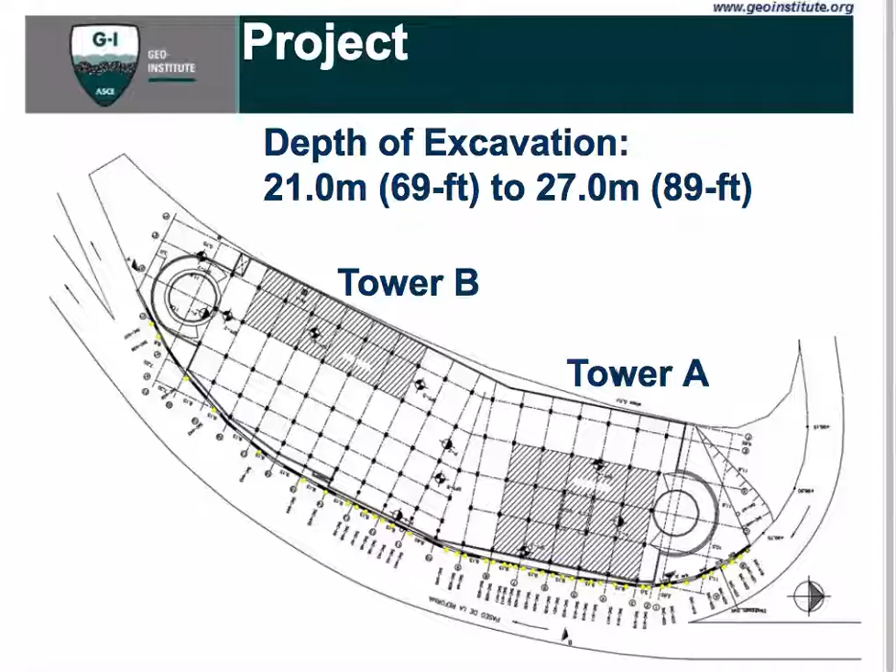So going from the 1970s to the 1990s, we see major development happening near the project site. Prior to that, this region was abandoned. Twenty years before the 1990s, in the 70s, this place was used just for accumulation of non-controlled fill materials, brought in from the city and placed without any control in placement or material classification.

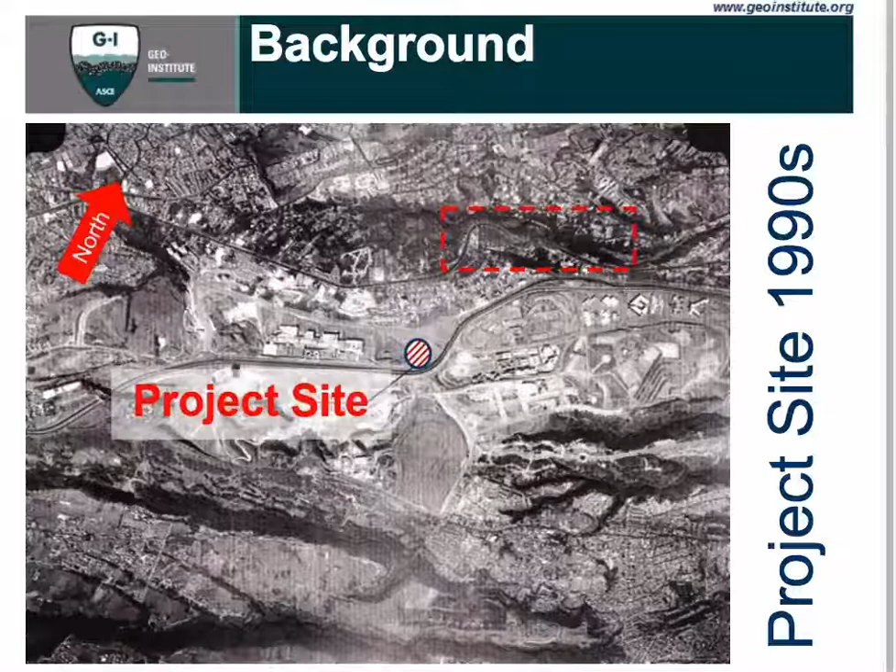So looking at the site again, we went through a process of geotechnical exploration. We selected 7 standard penetration tests, or SPTs, 4 open shaft explorations, and 45 solid stem auger tests just to see what comes to the surface. We also had access to another 15 standard penetration tests that had been done in the past.

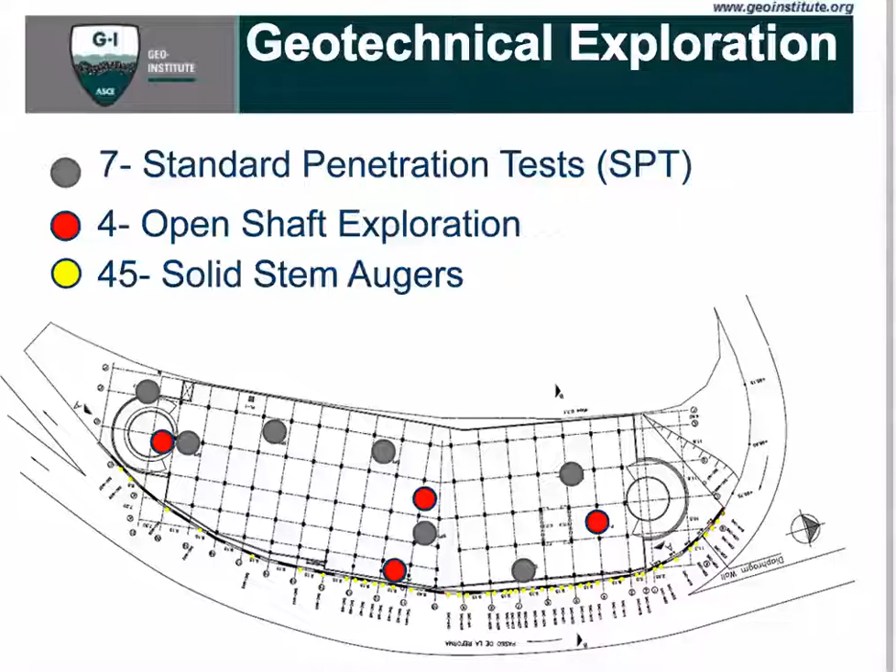Based on the existing information and new exploration, we were able to classify the material. However, the challenge wasn't so much classifying the subsurface—it's important to understand what's underneath before excavation—but assigning design parameters for this purpose was a major challenge. On top of that, knowing how far down this fill material extended was also another important factor for the excavation project.

So we selected some representative borings. The majority of borings came out the same, though elevations would change as we moved from the north end to the south end, with this fill material becoming less and less thick. I'll show that in a couple of slides.

How did we classify the non-controlled fill material thickness? Looking at these borings, we have primarily medium coarse sand, some clay, and construction debris up to 5 meters, followed by sand and silt, clay mixed with construction debris and plastic material up to 19-20 meters. After that, down to 26.4 meters, we had again construction debris, clay brick fragments, gravel, and sand and silt mixed. At the end, the blue sand, or blue dense sand, is a silty sand with less than 4% fines, classified as dense. This is very typical of the region.

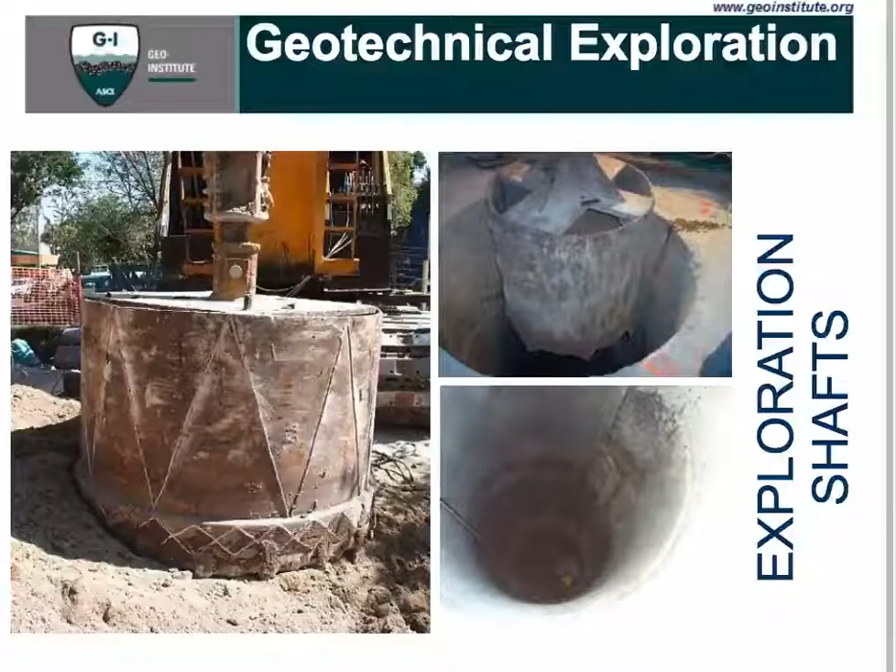But on top of that, we did some exploration shafts. These were like 4 feet diameter, stabilized shafts, vertical, open. The purpose was just to open the shaft, go inside, with certain restrictions from local authorities, and do a visual inspection, as you can see to the left. That is from the protection around the perimeter of the shaft, we were able to open and look at the material. To the right, you can see a couple of pictures of the material coming out from the auger, the flight auger testing.

So we can see there are all different types of materials - different types of construction debris, plastic, even there's a shoe there, I guess. So it was a challenge at that point: how do we classify this?

Do we assign design parameters based on SPT? Do we assign design parameters based on lab testing? Or do we just go ahead directly and design everything based on assumed data and do some testing - which is what we did, and we're going to look at the data here shortly.

So we got some preliminary lab report: average unit weights of 1.75 tons per cubic meter - those are the standard units used in Mexico, about 100 pounds per cubic foot - and the internal friction angle of 30 degrees, and cohesion values were negligible. I apologize for that typo, that should have been an I, not an A. And we considered a surcharge of 0.75 tons per square meter, or 150 pounds per square foot, for the design process.

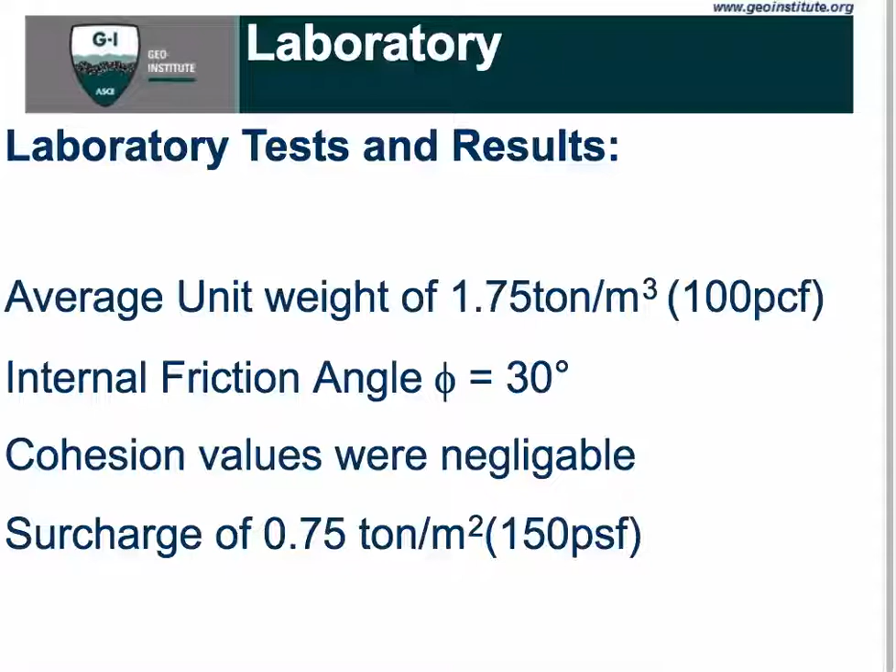And with that, and the results of the boring, we started looking at the thickness of this fill material and how we would approach the design by sections.

So now we're going to look at Tower A to the left, because now we're looking at the future diaphragm wall, at the design of the diaphragm wall. Tower A is to our left and Tower B is to the right. You can see the blue material, obviously, is the blue sand. And the yellow coloring represents deeper sand deposits classified as a very dense cemented sand.

Tower A foundation solution - you can see the dotted line - we decided to go with drilled shafts, and Tower B was designed with spread footings at certain depths of footing in the blue sand.

Now, based on the results of the explorations, the SPT, and the vertical shafts, what we found was that between approximately 8 and 23 meters - that's between 27 to 75, 76 feet deep - that's the non-control fill material, or unnatural soil. The deepest thickness will be to the north, and the shallowest will be to the south, closer to Tower B.

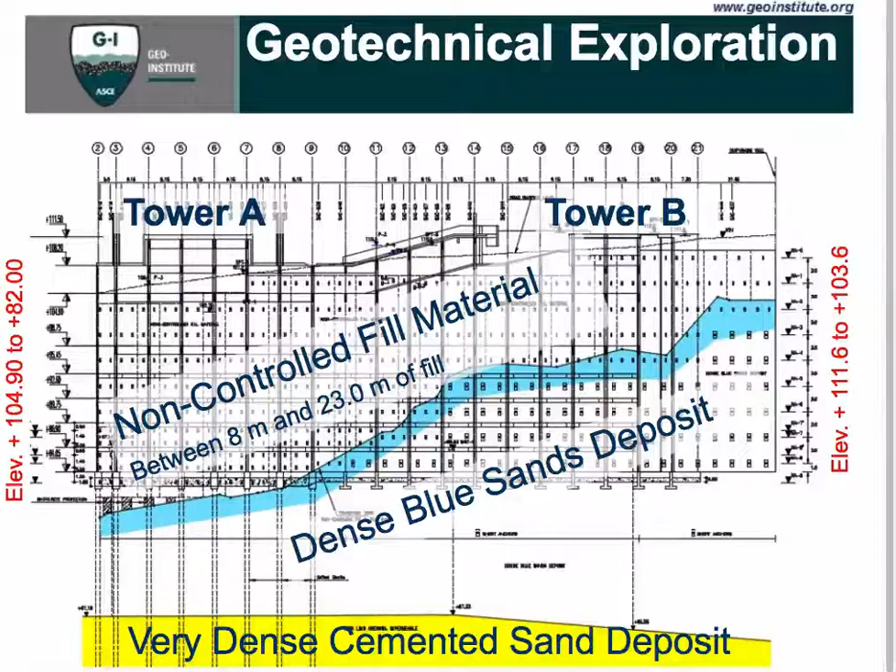Then from that elevation we would have a dense blue sand. A couple of important things to mention are the transition zone and the existence of the diaphragm wall when it goes to the transition zone.

So I'm going to go on - I think I missed 15 minutes, I apologize for that. We started our design going with a horizontal pressure based on Rankine, and then redistributed the pressure using Terzaghi-Peck and some of the modified Mexico City methods that existed.

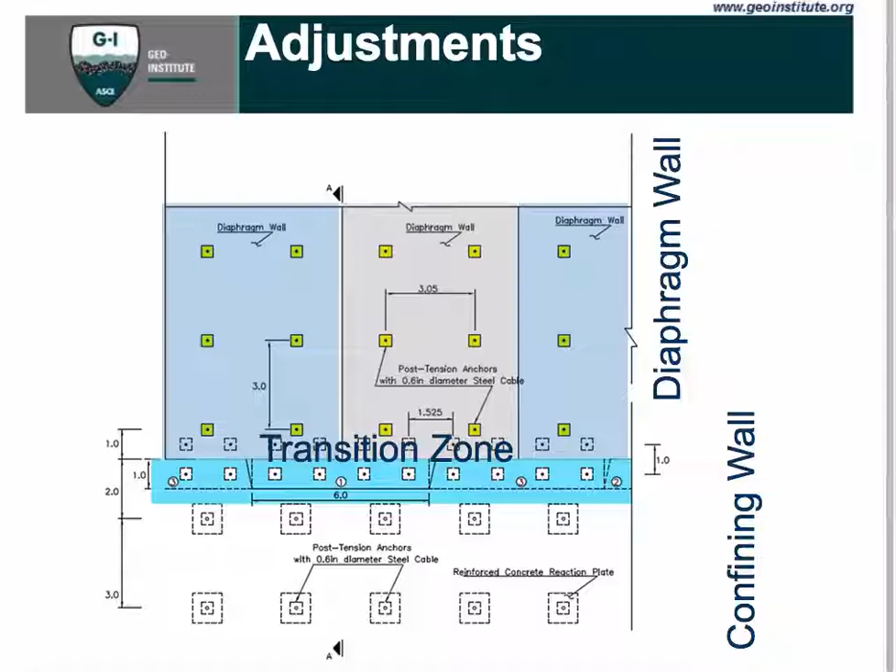We basically distributed the anchors at 3 meter by 3 meter spacing, post-tension, and came up with approximately 75 tons of resistance. To achieve that resistance, since we had much uncertainty about this fill material, we decided to perform load testing above the transition zone, near the confining wall and diaphragm wall, and below the transition zone. We installed a couple of these anchors and tested them.

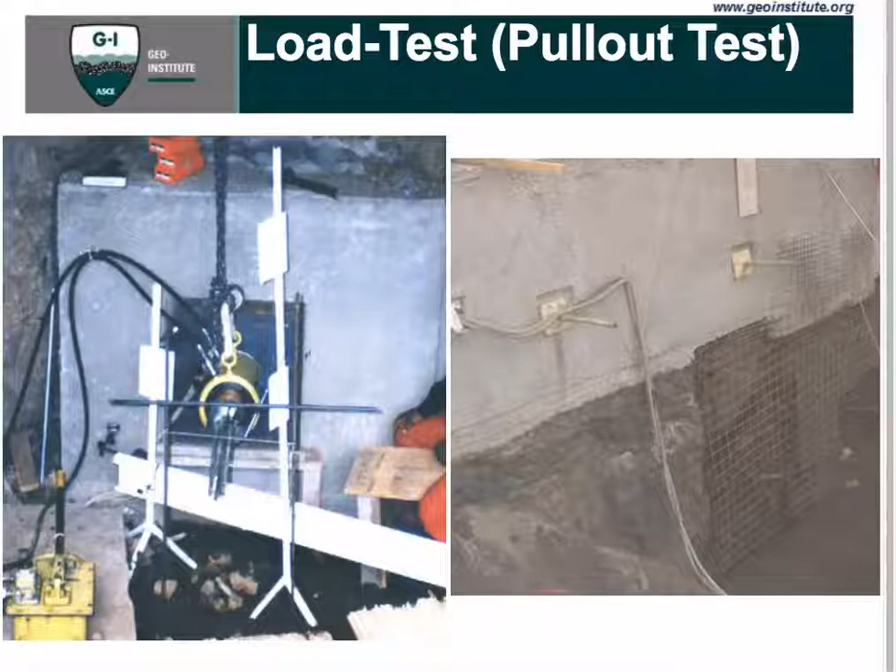Here are the details on the testing, performed in two phases. Phase 1 was to arrange the cables, going to 25 tons and 40 tons. Phase 2 was taking it to twice the load, approximately 140 tons, and we got results within 1% elongation.

The total bonding length was 15 meters, the working length 15 meters, and 1% of that - the closest one was anchor test number 2, which approached 15 centimeters.

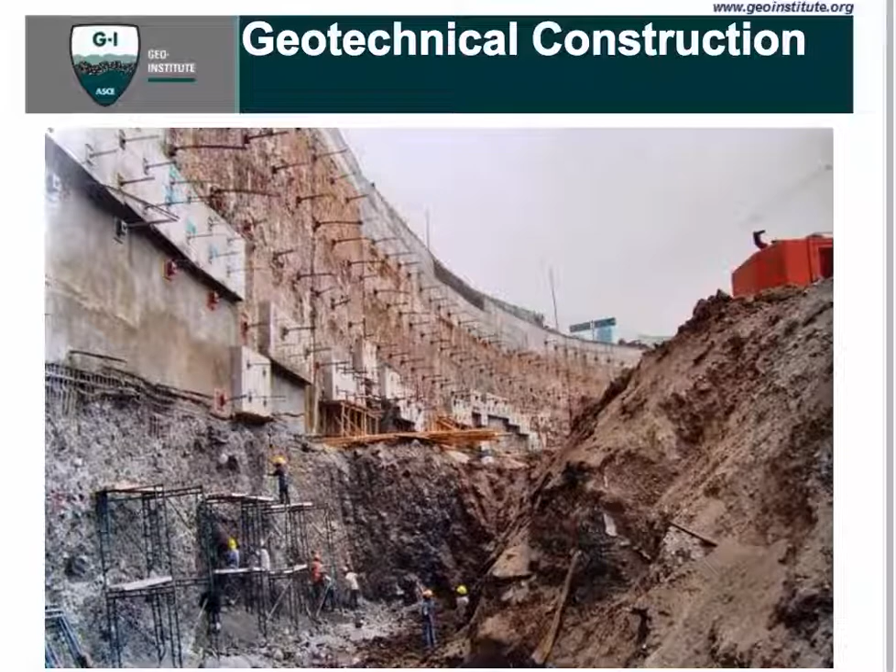Finally, some major challenges we had to go through involved the transition zone. With all the different explorations, we did not basically match this transition zone. So in some places we needed to create new confining walls to retain that bottom transition zone, and in some places the elevation presented at a different level than we had expected.

During this, we had challenges, as with anything else, about available information, quality and quantity of site explorations, quality of lab testing and the results, how we selected the design parameters, how we verified this design through load testing, and we had to modify certain construction processes, including monitoring and instrumentation for this project.

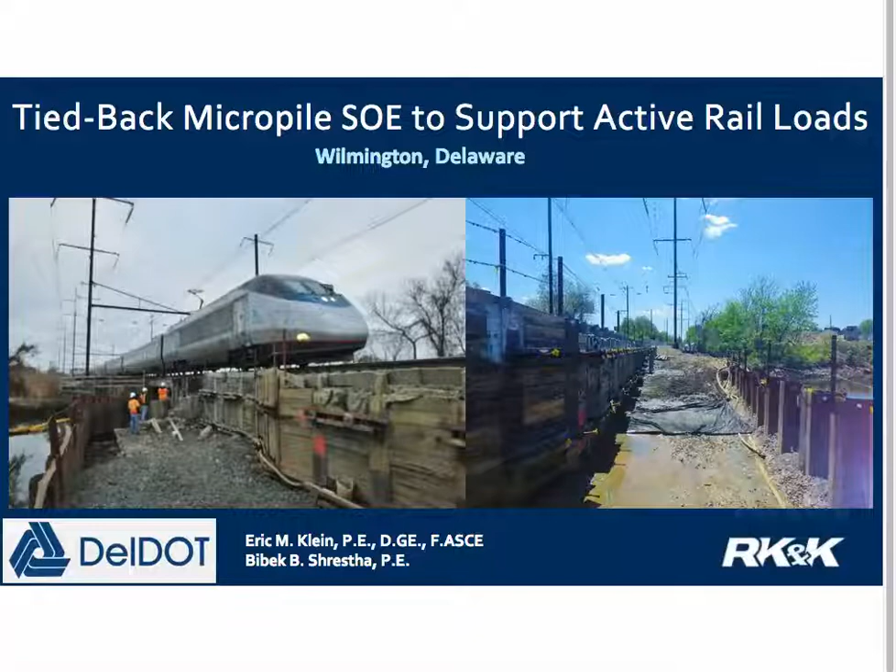tiebacks in this case. This project is located just southwest of Wilmington, Delaware, just northwest of I-95 and I-495, and upstream of the confluence of Little Mill Creek and the Christina River. As you can tell by looking at the drainage patterns there, the area is very very flat, swampy, and outside of the swamp, it's very congested.

Now, the Northeast Corridor is the main rail corridor serving intercity passenger rail between Washington, D.C. and Boston. Through Delaware, it's owned, operated, and maintained by Amtrak. But in addition to Amtrak trains, you've also got Norfolk Southern Railroad freight traffic, the Delaware Transit Corporation, and SEPTA, the Southeastern Pennsylvania Transportation Authority, have commuter passenger rail service, so it's getting very crowded.

Generally, throughout most of the NEC, there's 3 tracks, but there's about a 1.5 mile long gap here in Delaware that was creating congestion. Now, the tracks in this area were first laid in the 1850s.

The oldest plans we had were from 1929, and they showed the addition of electrification, the construction of a 3rd bridge, which is the purpose of this study, and repairs to the abutments and wing walls of an existing bridge that carried 2 tracks. Those existing 2 tracks that crossed Little Mill Creek were 30 feet long, and that bridge was built in 1913. This 3rd bridge, the track that carries the 3rd track, was built in 1929, was 54 feet long to accommodate a bend in Little Mill Creek.

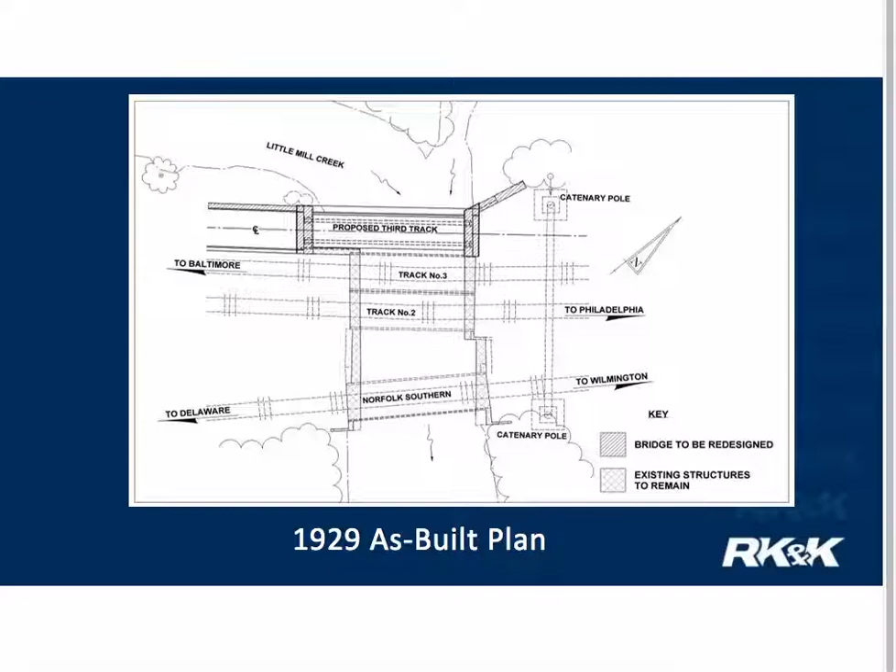This fence diagram here simplifies what we found. There was fill associated with the embankment, mostly fine-grained material - silt, low-plasticity clay, some sand, some oversized particles, about what you'd typically expect. Then there was some soft to medium organic clay associated with swamps, typical of where we were. Then we had some medium dense coarse-grained soil, mostly sand and gravel, I think that was Cretaceous age. And that directly overlaid some continuously or completely weathered rock to bedrock.

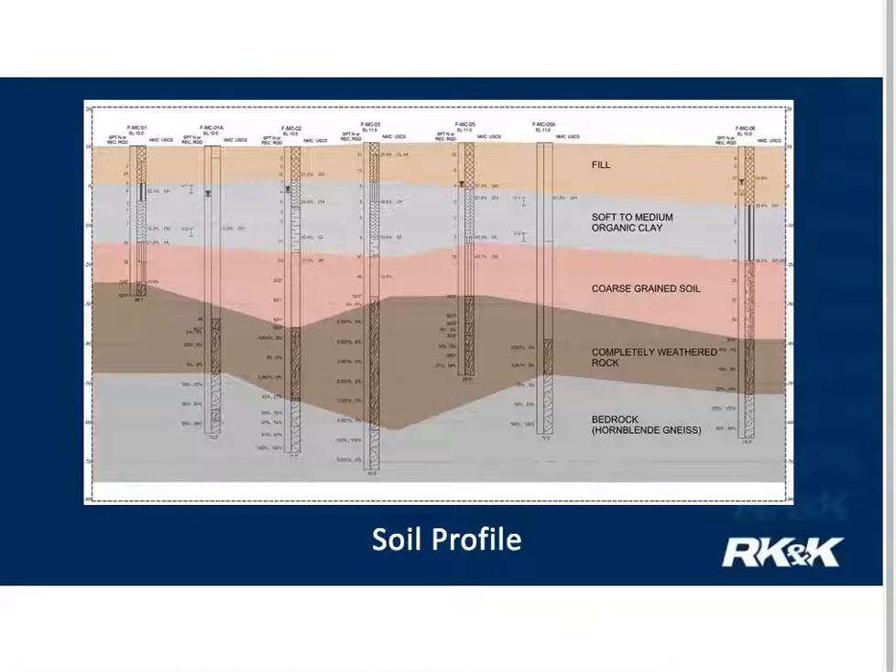Fortunately, northbound trains were already starting to slow down for the Wilmington station, and the southbound trains were still accelerating out of the Wilmington station, so they weren't going their full 120 miles an hour, I think.

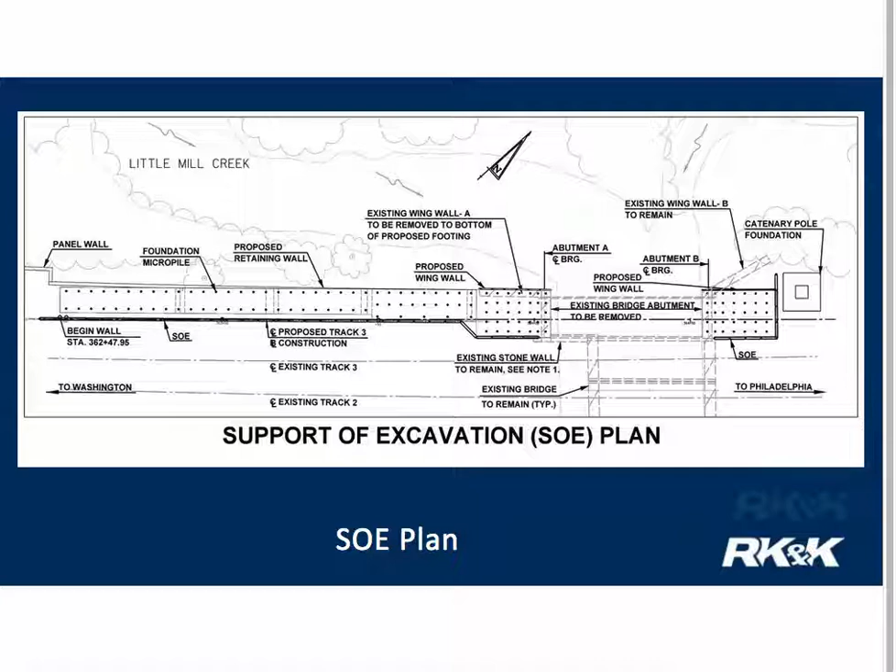The plan view here shows the north abutment had an SOE, to the right of the figure. It was L-shaped because you also had to support a cat-pole foundation. Then to avoid impinging on wetlands, we had to extend the wing wall almost 300 feet from the south abutment. All those dots you can see are the micropile foundations.

The micropiles were a 7 5/8 inch diameter, half-inch thick wall casing made of 80 KSI steel. To provide some additional stiffness, they added a 5.5 inch diameter, 20-foot long casing in the upper 20 feet, with no joints installed to help improve the stiffness of the micropiles themselves. The micropiles generally were 2-meter-long sections, at 5-foot center to center.

Because there were 2 rows of tiebacks with some pretty significant down angles, the axial load on each micropile was about 25.5 kips. At this point, I'm going to turn this over to Bibek, and he will go into more details on the construction and the instrumentation results.

Thank you, Eric. I'll be talking in more detail about the construction itself. This is a typical cross-section at the abutment. As you can see, we needed quite a wide section excavated to install all the micropiles for the abutment foundation, which resulted in our SOE being installed 2.5 feet from the edge of active track.

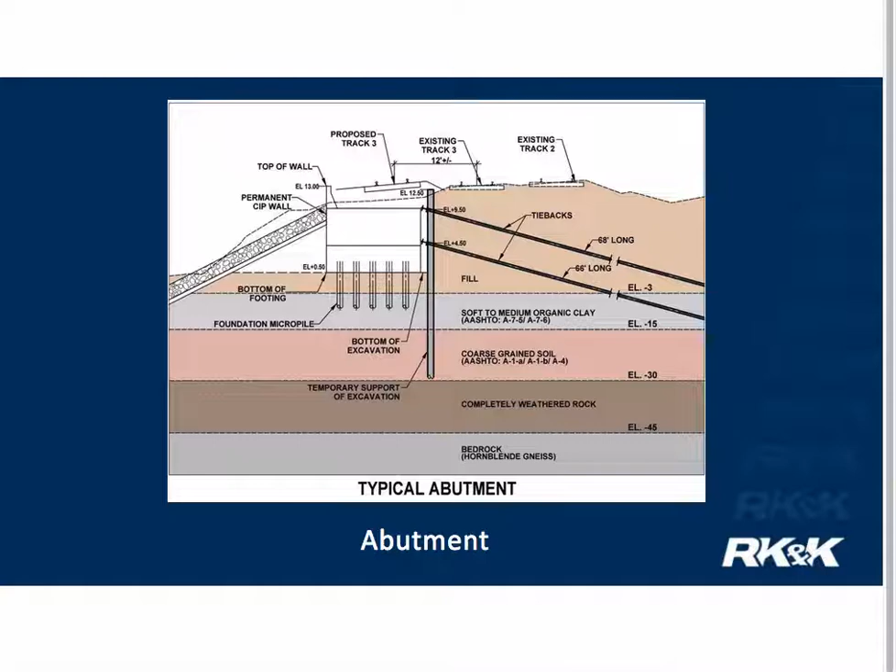The tiebacks needed a steep angle because Amtrak required that no element would be within 4 feet of the ties. The length of the tiebacks were in excess of 60 feet. We had 15 feet of unbonded zone, and the rest, 50-plus feet of bonded zone.

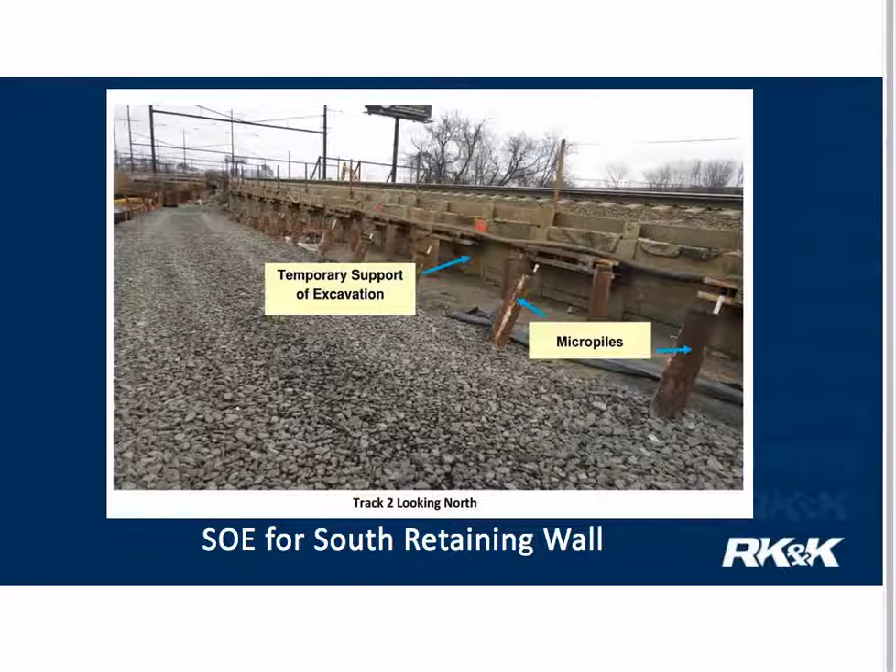The train above is an Amtrak train. That was how close the trains were running to our support of excavation. And further north, you can see the stone masonry for the old abutment. This was during the demolition of the abutment while we were taking it out for the new abutment.

Now, during construction, here's a picture of the wing wall of the existing abutment that had to be left in, that was supporting the active track.

All our as-built plans showed that the wing wall was all the way to the top of the ballast. However, during construction, we found out that the walls didn't go all the way up, so we had to design a ballast stop to retain the ballast of the active track. A contractor initially designed a system to install micropiles through the stone masonry wall. However, during construction, we found that the stone masonry was just a veneer wall with rubble fill behind it. So we designed the micropile system in front of the wing wall and put in tiebacks to support the ballast.

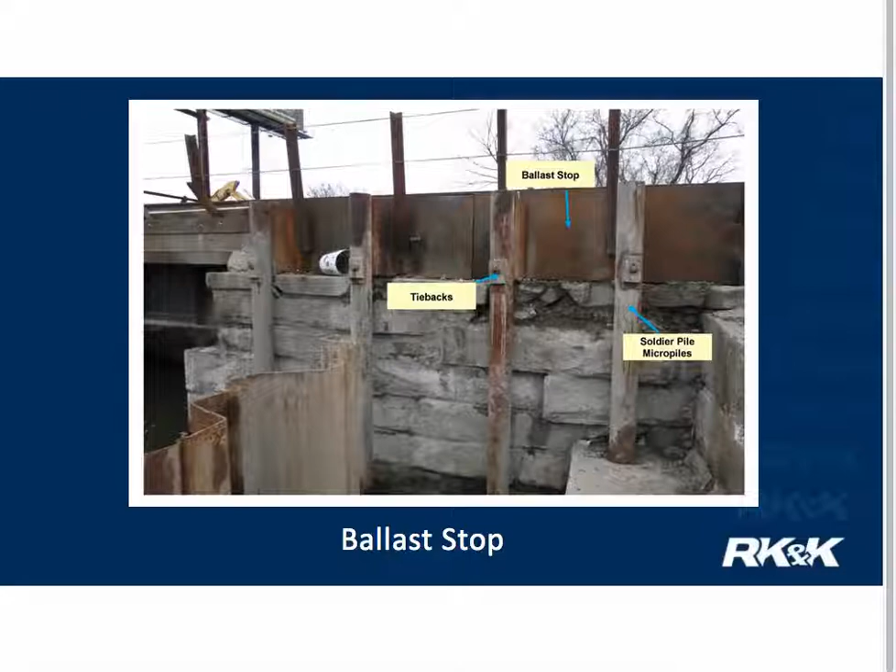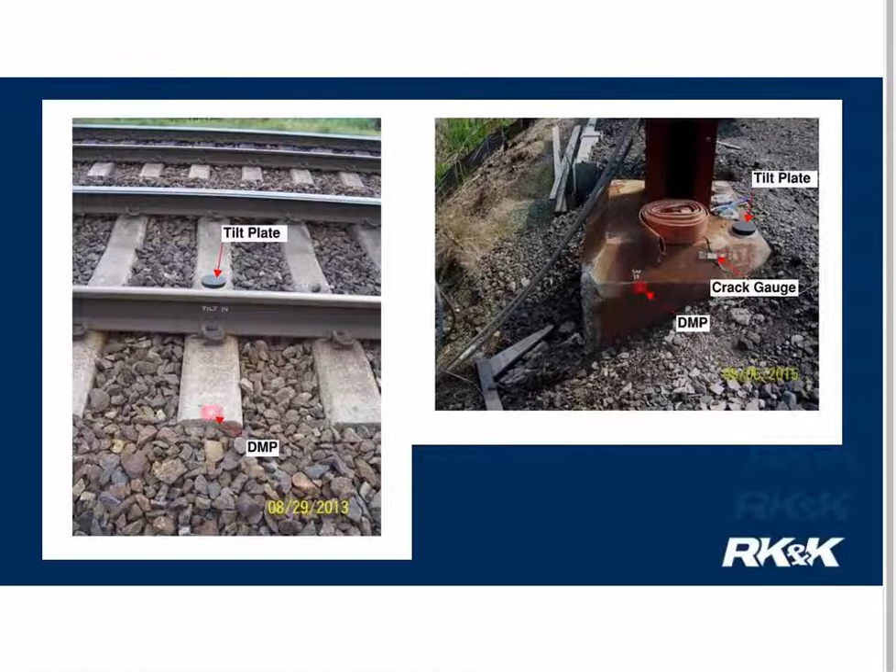Here's a snapshot of the instrumentation we had in and around the bridge. We had a lot of deformation monitoring points - on the ties of the active track, on the soldier piles we installed, and on the catenary poles as well. There's some pictures of the instrumentation, like tilt plates and deformation points on the ties and catenary poles.

Around September 2015, we finished installing the grout bags and scour protection, and also grouted behind the grout bags underneath the existing abutment. After that, you can see the movement flat-lined, indicating that all the movement happened because of the scour. While doing these measurements, we also went out and retested every tieback, thinking it might be creeping and causing the movement, but we found they were still working with not much creep on them.

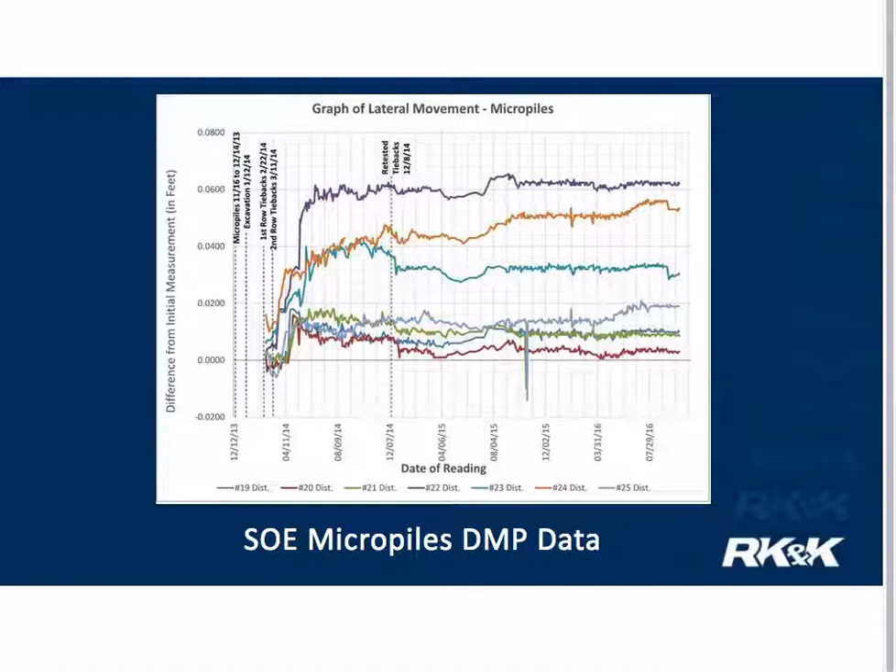In conclusion, micropiles can be used in low overhead clearance and limited access conditions. If properly designed with tiebacks, they can support significant lateral loads. When necessary, if higher section modulus is needed because the casings themselves don't have significant section modulus, we can use composite sections with multiple circular casings to increase the section modulus. As for the deflection of the SOE system, it's a function of the stiffness of the system, which in turn is a function of the spacing of the tieback and soldier piles.

The spacing is very critical in limiting the deflections. Tieback spacing is generally limited to 4 feet because of constructability and overlapping of the bonded zone for the tiebacks. Especially in our case, the tiebacks were in excess of 60 feet long, so we had to make sure they didn't meander and conflict with each other.

As far as constructability and flexibility, installation and locations in micropiles can be very flexible, and we can change during construction if there's any uncertain subsurface condition. Also, as we encountered, we were able to customize the system during construction when we found inaccurate as-built drawings. With this, we figured that micropiles are a great solution to limited access and overhead clearance areas for support of excavation. Thank you.

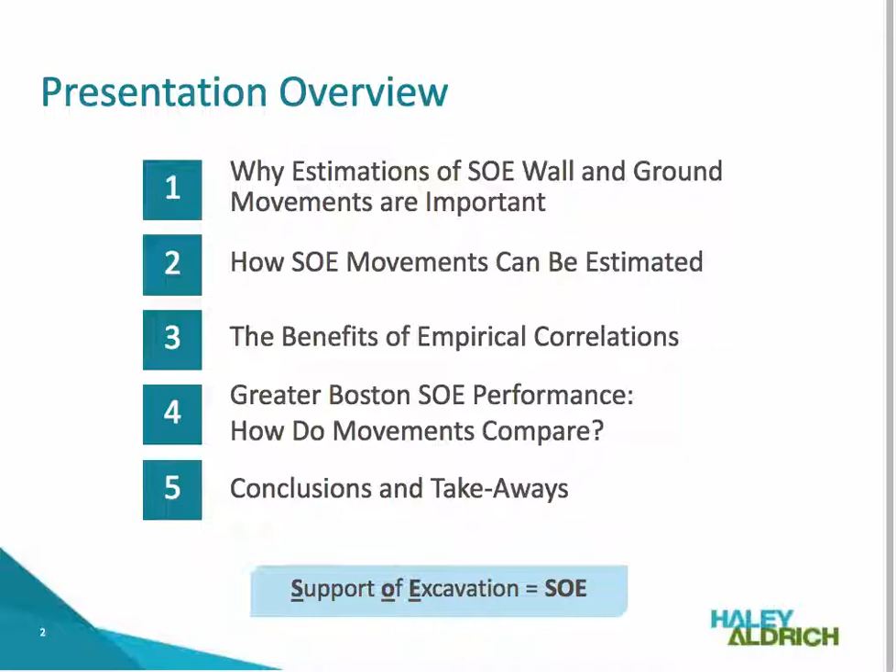Thank you, Glenn, for the introduction. I'll be speaking to you all this afternoon about support of excavation, wall, and ground movements. I'll begin by talking about why estimations of support of excavation wall and ground movements are important, how these movements can be estimated, some benefits of using empirical correlations to come up with these movement estimates, and then spend most of the time talking about how support of excavation performance in the greater Boston area compares to published literature. I'll end with some conclusions and takeaways, and you'll see the acronym SOE for support of excavation throughout this presentation.

So why are estimations of support of excavation movement important? Well, the thing that comes to most people's minds, and what we've seen in these previous presentations, is the settlement of adjacent structures is typically a hot topic, and that's going to be important for any abutter to your excavation. Of particular concern might be high-rise or heavy structures, historic structures of cultural significance, and any structure that is within close proximity to your excavation. And lastly, critical public infrastructure, for instance, like we saw in the previous presentation, railways or perhaps highways, tunnels, things like that.

Utilities can also be affected by ground movements. Significant ground movements can lead to interruptions in service. The last point I have here is constructability for the permanent structure. So, for instance, if your support of excavation wall is a concrete diaphragm slurry wall, it's probably also going to act as the permanent foundation wall for the structure. So the amount that it moves during construction is going to directly affect the rest of the structure and will be a concern for the structural engineer.

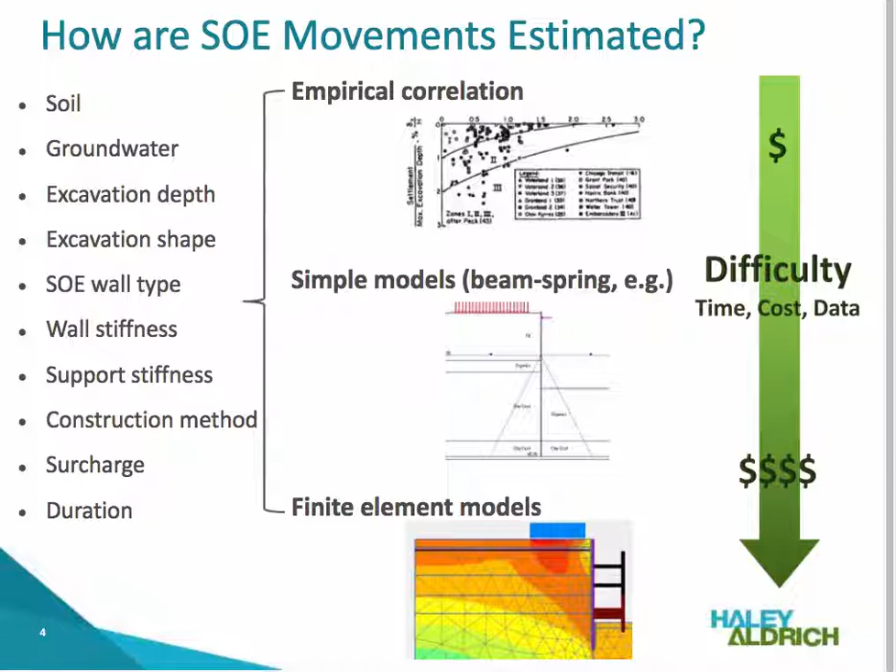But it's probably also going to give you a limited picture of the movements at your site. For instance, you might get movement of your support of excavation wall, but you might not get movement of adjacent foundations. To get that complete picture, you'll need something like a finite element model. Those tend to be much more time-consuming and therefore cost a lot more and require a lot of data to be done well. The point I want to make is that each of these methods can be good and can be bad ways of estimating support of excavation movements.

So when you have all of these different methods, why use empirical correlations? Well, as I mentioned before, they're very fast, and that can be instrumental for early phase design, where perhaps it wouldn't be appropriate to invest time and energy in a model when design parameters are changing quickly.

Additionally, empirical correlations are based on real project data. So they're not theoretical, they're based on observed movement from projects, which means that they're based on the good, the bad, and the ugly that happened within those projects. And that type of data aggregation provides you with a range of response.

That response range can be useful for a number of things. For instance, if you have a wall that's already in place, it can give you an indicator of performance. Did the wall perform better or worse than you expected? And it can also provide a platform to communicate risk to your client. Some clients might care a lot about ground movements, and using an empirical correlation might give you the opportunity to suggest investing in that fancy finite element model.

Alternatively, you might have a client that doesn't really care. Perhaps the excavation is in the middle of nowhere, a cornfield or a parking lot or some situation where large ground movements really aren't going to be a big deal. And also, because of the low investment for empirical correlations, they can be, and I would argue should be, used to calibrate or validate more complicated models, where depending on what you put in, it can be very easy to mispredict ground movements.

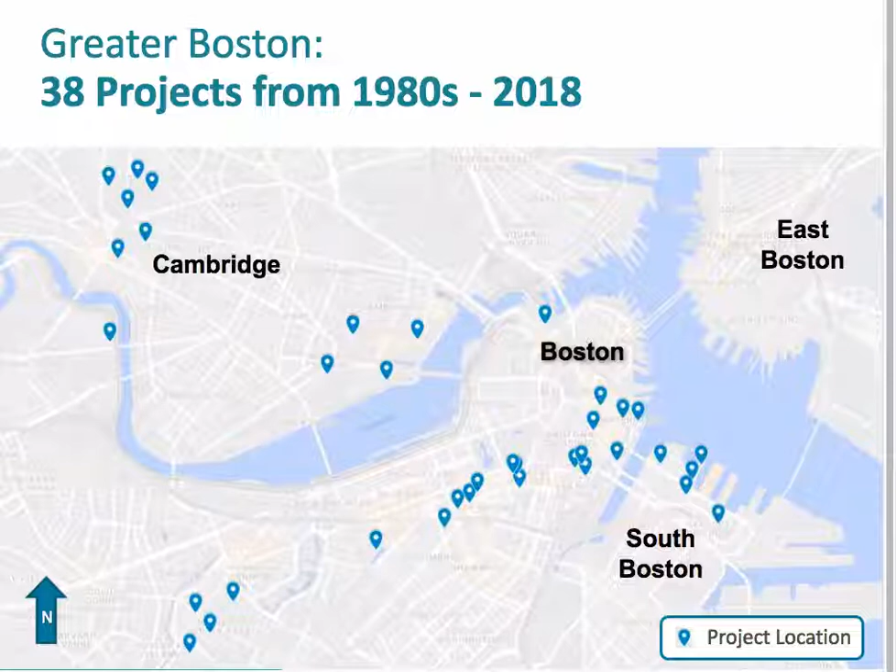We went through our project archives and for this presentation gathered data from 38 projects spanning from the 1980s to the present.

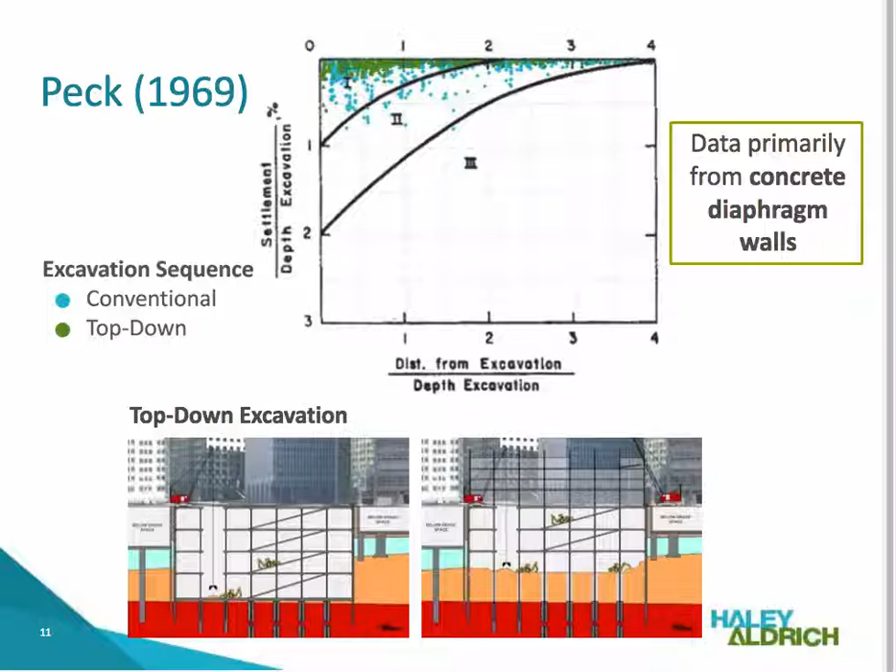Additionally, we've subdivided our data into data from different excavation sequences. Blue represents conventional excavation, and green is for top-down, where the permanent structure is also acting as the temporary support of excavation. So you excavate for your first level of basement, then you pour your permanent concrete floor, then you excavate to the next level, et cetera. Because of that, that concrete floor provides diaphragm action, which is a little bit stiffer than a typical excavation system. And you see that in the ground movements - those green dots tend to be clustered towards the top and are typically lower than the conventional blue construction methods.

For stiffer strata, Clough and O'Rourke put together this plot that now has a new envelope range for excavations in stiff to very hard clay. So I've now further subdivided our data by both excavation sequence and also soil type. On the left, I'm showing conventional excavation sequences, and on the right, data from top-down excavation. On the top, I've got excavations in clay, and on the bottom, excavations in till. And you can see that Clough and O'Rourke's envelope of these movements pretty much captures our data for either type of excavation sequence in till and for the top-down excavations in clay. However, our conventional excavations in clay have a lot of points that land outside of this zone. So this probably would not be an appropriate figure to use for that type of situation.

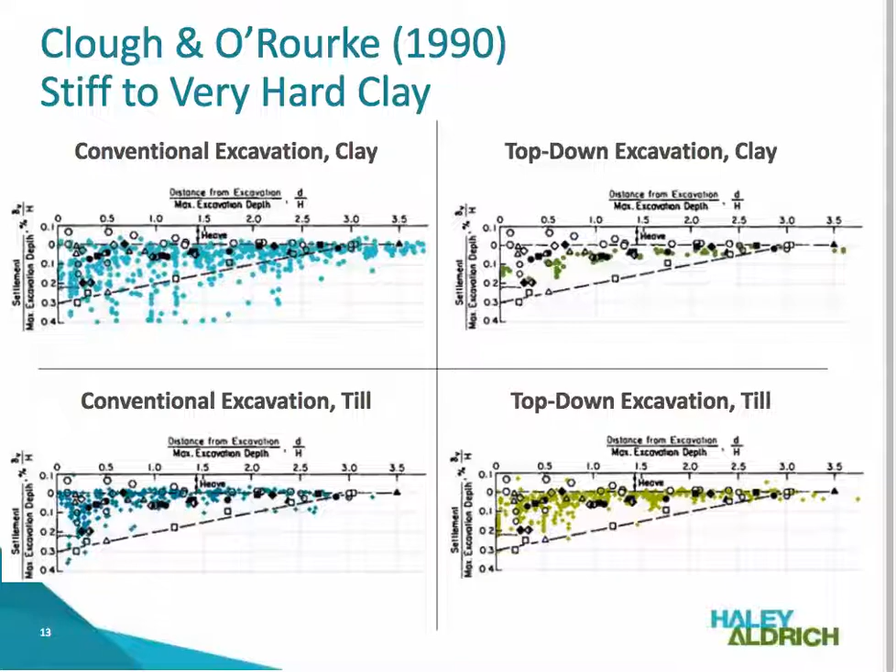And that's really what I want to bring home to everyone. It's important to know where these diagrams or equations come from before you use them and make sure that they are applicable to your project situation.

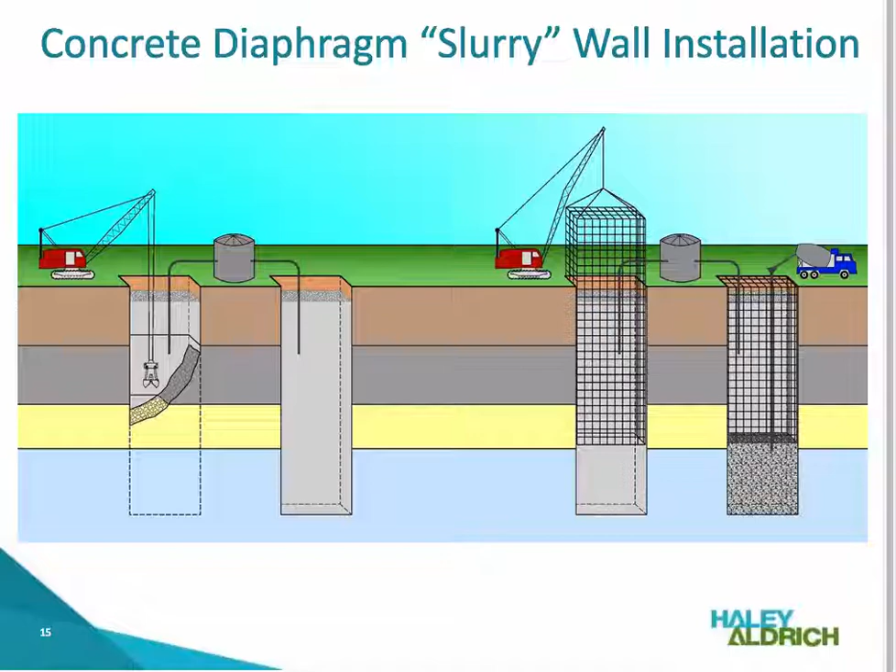While that slurry does a pretty good job keeping the panel excavation open during this construction process, it can't necessarily provide that same amount of lateral stress that the soil felt in situ. And consequently, that results in a stress release. And that stress release can be associated with ground movements.

So to conclude, empirical correlations are a fast and useful way of estimating ground movements, but you have to ask yourself, is this applicable to my project? We learned, for instance, that for conventional excavations in Boston clay, we should probably use Clough and O'Rourke's soft to medium clay plots, not the stiff clay plots. Construction method plays a significant role in ground movements. Top-down excavation procedure typically resulted in smaller ground movements than conventional construction sequences. Lastly, beyond 50 feet, ground movements due to slurry wall installation are typically within survey tolerance, but for situations closer than 50 feet, you may want to consider installation effects in your ground movement estimates.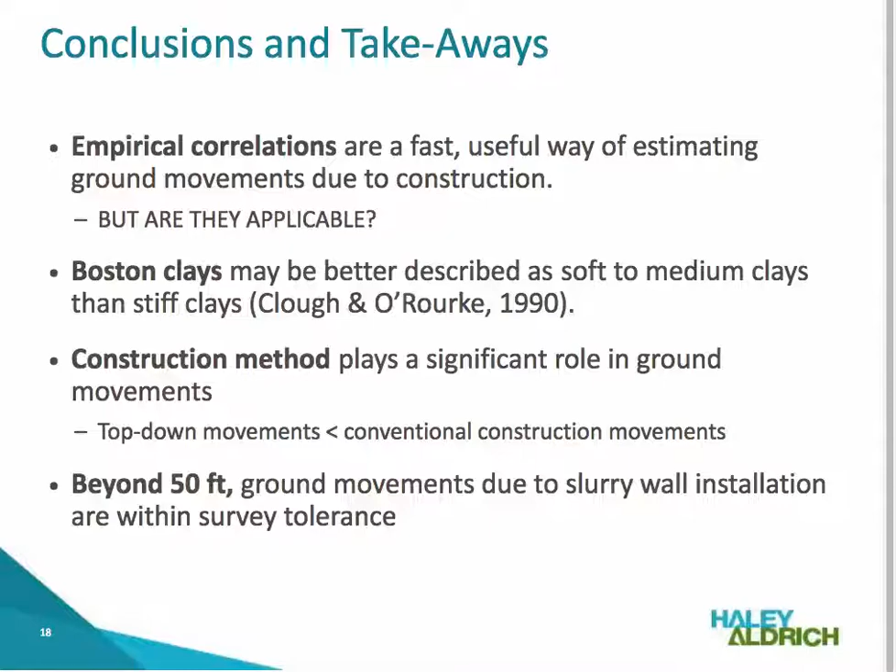And with that, I will conclude and give a special thank you to Hugo Meggett in our Boston office, who did a lot of the legwork going through our project archive to come up with the data for this presentation. And with that, I will take questions.

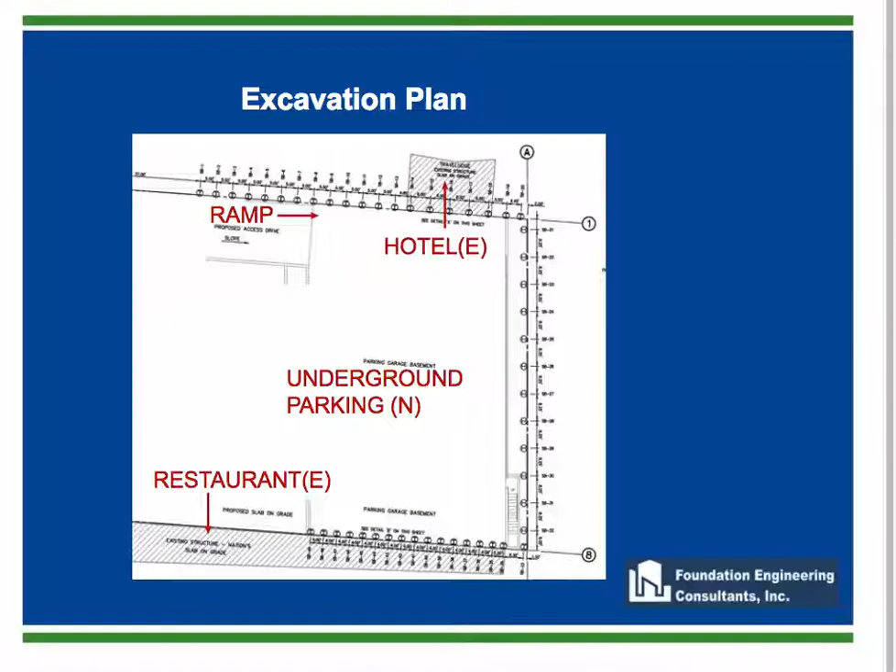The geotechnical consultant did 2 borings. They did one boring towards the rear side of the building and one boring towards the front side of the building.

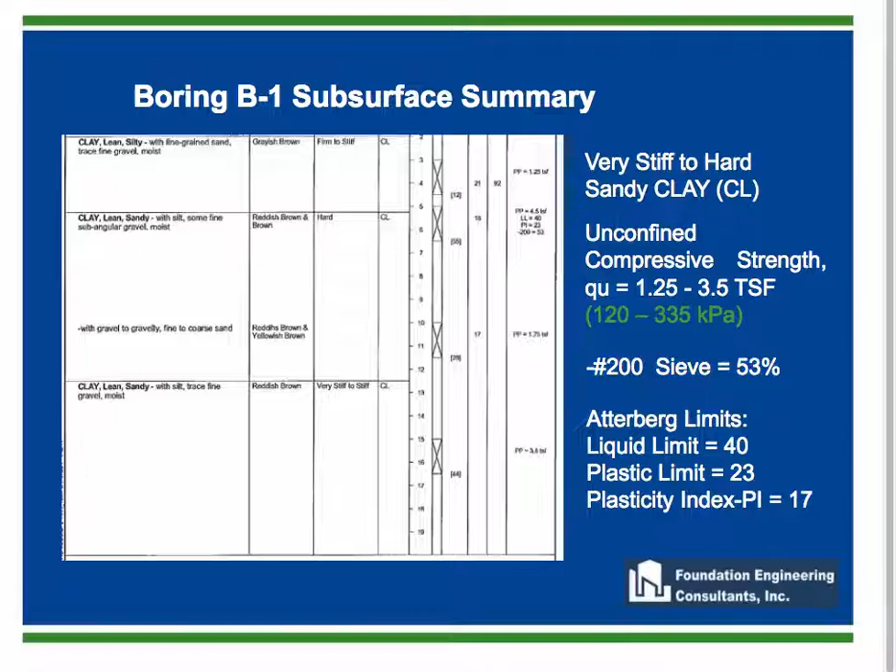We will now see what the subsurface profile looks like, and this is taken from boring 1. By the way, boring 1 and boring 2 were very similar. They mostly comprised of very stiff to hard sandy clay; unconfined compressive strength values from a pocket penetrometer was from 1.25 TSF to 3.5 TSF, or in SI units about 120 to 335 kilopascals. The minus 200 sieve was 53% passing, so it's barely cohesive material. They did do Atterberg limits, and the liquid limit was 40, plastic limit was 23, giving us a PI of 17.

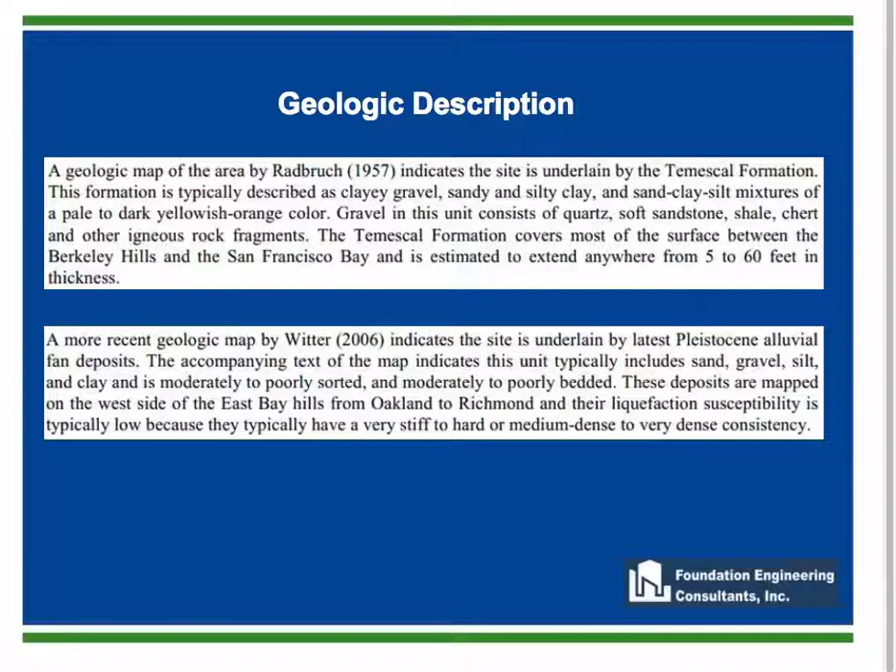If we look at the geology at the site, it is mapped as alluvial fan deposits, and it's fairly uniform in this part of Berkeley. It's not the Berkeley Hills, but the level portion of Berkeley, a flat site. There were two geologic maps referenced in the geotechnical report. One was done by Radbruch in 1957, which found a Temescal formation, mostly clay, gravel, sandy, and silty clay. Then there was a more recent geologic map by Witter in 2006, which classified it as latest Pleistocene alluvial fan deposits, still clay material.

So when we did the design, we had to reference the geotechnical report, and from that soils report we were given active earth pressure from the backfill side of 45 PSF per foot. We were given allowable passive resistance of 350 PCF, and we were asked to ignore passive resistance in the upper half foot. The passive wedge is a value that corresponds to the soil friction angle. For example, if your phi is 28 degrees and you multiply by 0.08, you get the passive wedge, which in this case is 2.24.

And that's what the width of the passive resistance is below the excavation level. Because we're in California, the seismic earth pressure was just a simple 10H, and we had to consider surcharges. So we had two different surcharges: one is from the adjacent ramp, which we consider as 150 PSF. Then there were the building surcharges, one right underneath the hotel and the other the restaurant. For the restaurant we used 2,000 PSF, and for the hotel, the Travelodge, we used 2,500 PSF.

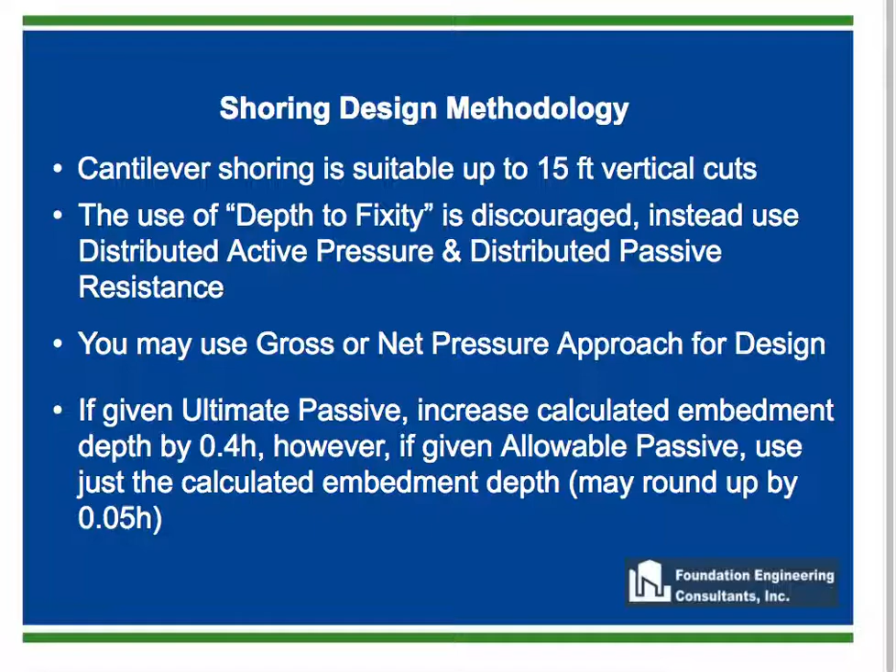It doesn't take into account the distributed nature of the backfill pressure and the distributed triangular or trapezoidal load of the passive resistance. However, when designing cantilever shoring, you can use either the gross pressure method or the net pressure method. And this ultimate passive, I just covered that earlier.

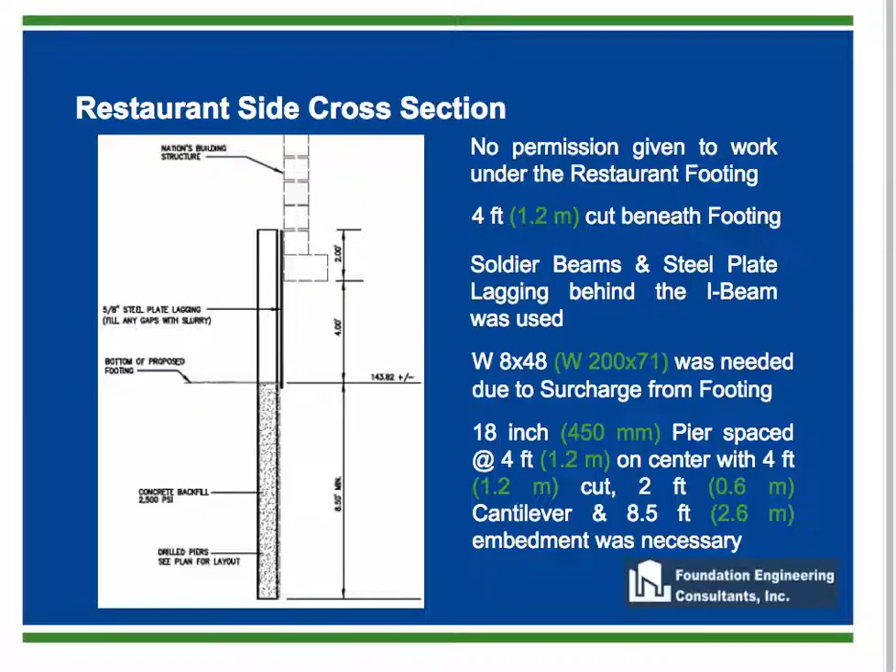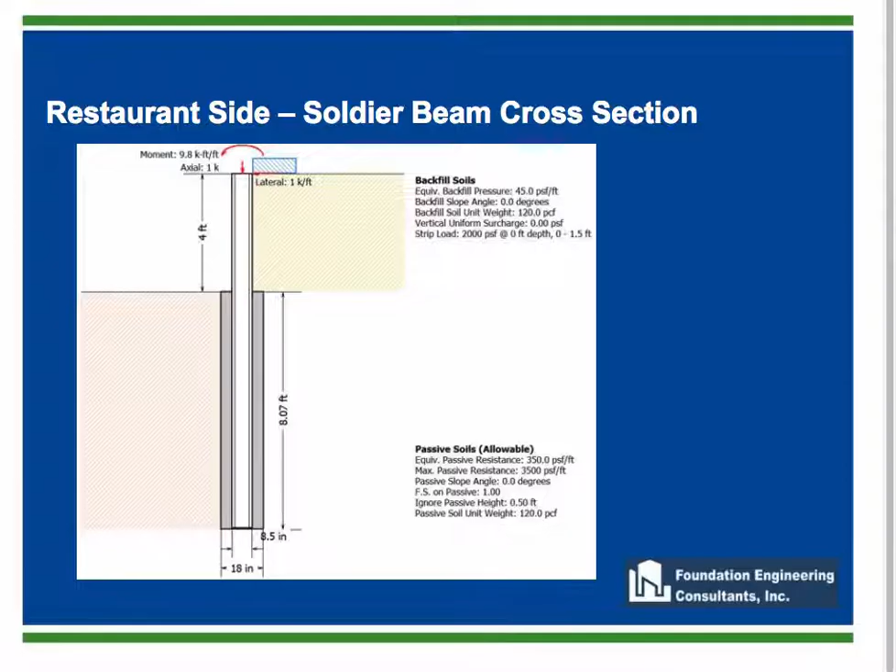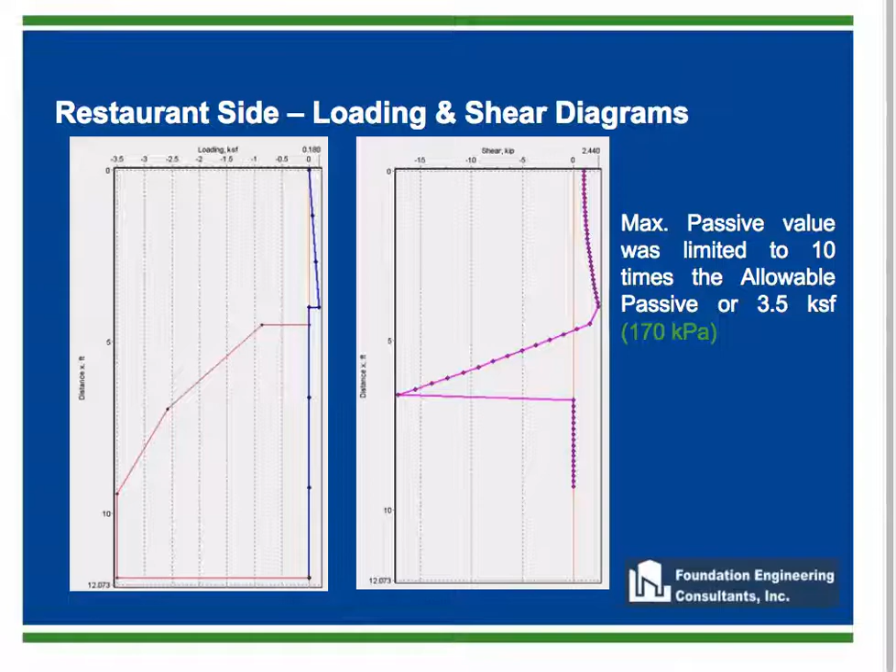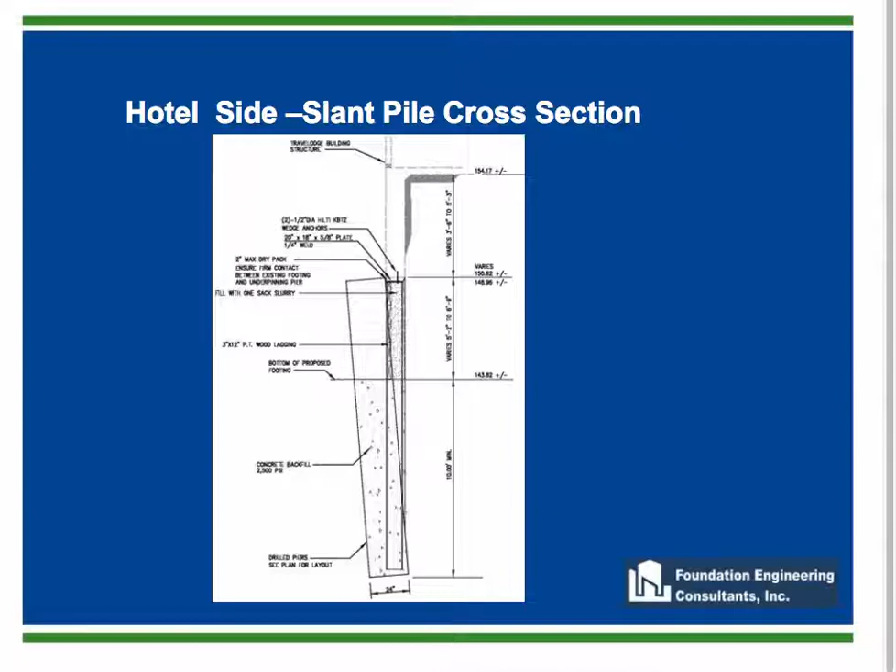Now we need to look at the hotel side. This is the existing hotel, and because the architect wanted to expand, he wanted to have the I-beams right underneath the hotel. We were given permission. So if you look at the cross-section, we had to do a slant pile, lower the I-beam, then push it back up underneath the existing structure and connect it with anchor rods and fill it with concrete.

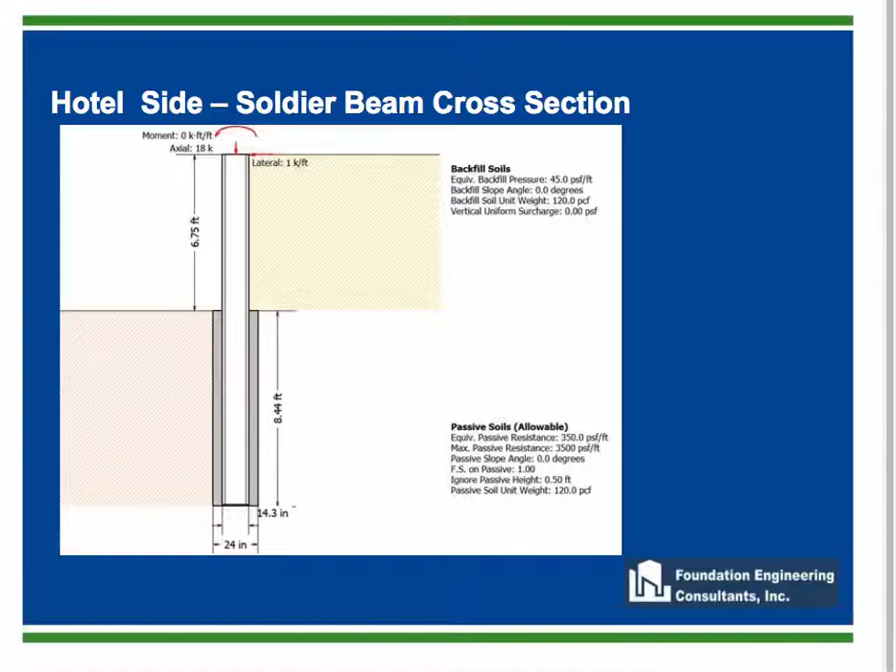Here is what the cross-section looks like. The yellow soil is the backfill soil, and the darker brown is the passive resistance. When you look at the hotel side, we had to use a 24-inch pier—18-inch was too small—and we ended up getting about another 3-inch clearance on the diagonal.

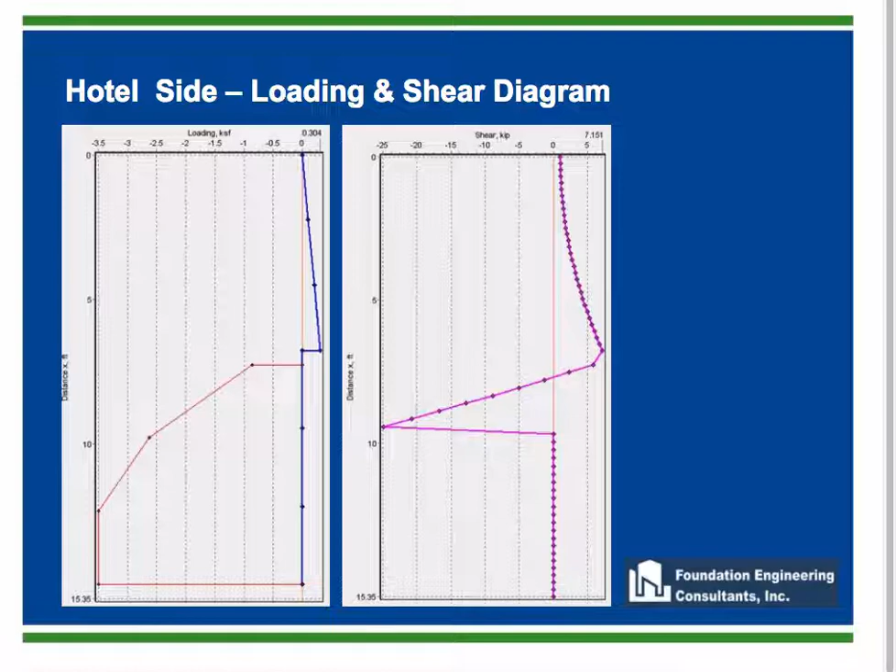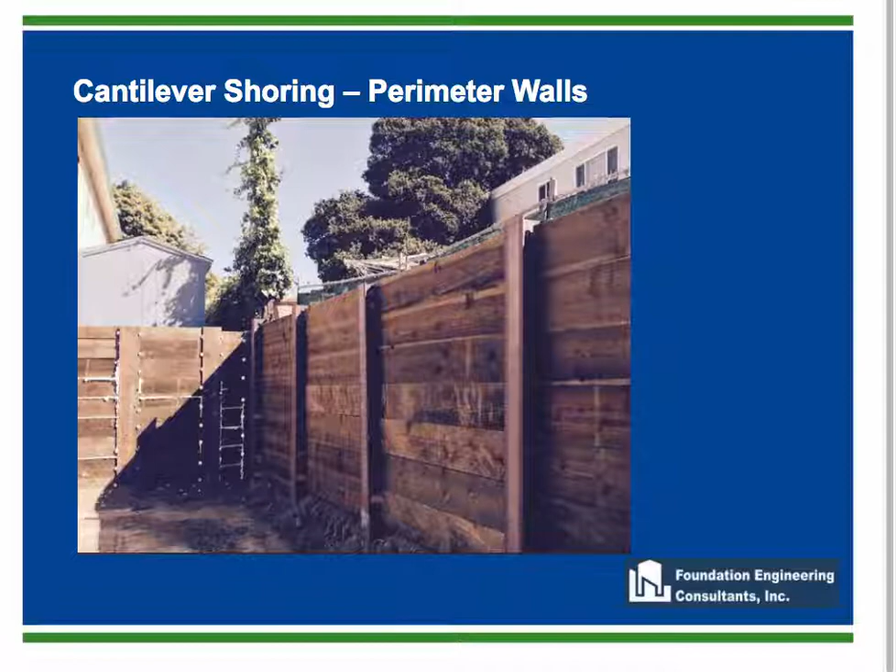Now, because this was a rectangular site, we had to have I-beams all the way around, and this is the section where there are no structures behind. About 18 months later, the building was completed, and this is what it looks like. Obviously, you cannot see the work which is below ground.

In conclusion, I'd like to say for cuts less than 8 feet, even if we use them as underpinning, like a beam column, they can be designed as a cantilever shoring. But if they go much higher, like 10 or 12 feet, then we'd like to consider putting a tieback. When a neighbor doesn't allow work under their property, it's typical to see that from time to time. We have to use closely spaced piles and limit our deflection to 0.1 inch. But one thing that helped us with this project is we had very stiff, cohesive soils.

For references in designing this project, we used the AISC steel manual, and there's a good book called Recommendations on Excavations by the German Geotechnical Society. And with that, are there any questions?

Well, thank you, Lipton. A very interesting presentation.

Before we go to the questions, I had a question about how you were able to drive the piles immediately adjacent to the restaurant. There must have been some kind of extension that you used on the pile head, or how was that possible? Yes, because we had cohesive soil and existing structure, Glenn, we decided not to drive, but instead to do a drilling method. So we used an 18-inch auger and came right against, because their property line ends at the outer edge of the footing. So we were able to come right at the edge and then drill an 18-inch pier and lower the I-beam.

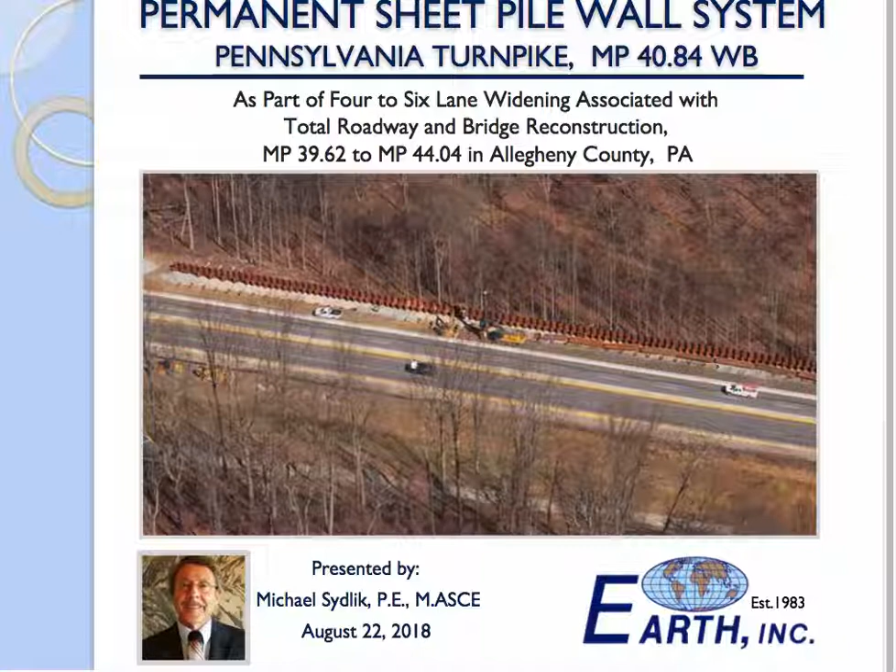So what happened was, prior to the bid, there were 2 retaining walls. One was about 740 feet, and it was the as-designed MSE wall. They did allow a T-wall alternate, but no other wall types were allowed. So we saw that since they were asking for this one wall, if we could steepen the slopes and use select rock, that could save them some money. So indeed, that's what happened—the 740-foot wall was re-engineered, value engineering, with select rock, high-quality quarry rock.

About a week before the bid was due, there was another longer wall, 1,573 feet, also designed by the owner and their consultant to be an MSE wall. Because of this widening, this MSE wall was hanging down over the existing slope. That meant you weren't able to take advantage of any passive pressure resistance in front of the wall, as the 1.5 to 1 slope is 33.6 degrees, and the parameters we could use were those from the original design, which was a phi of 32. So technically, if you tried to plug in passive pressure resistance, you'd actually get a negative number.

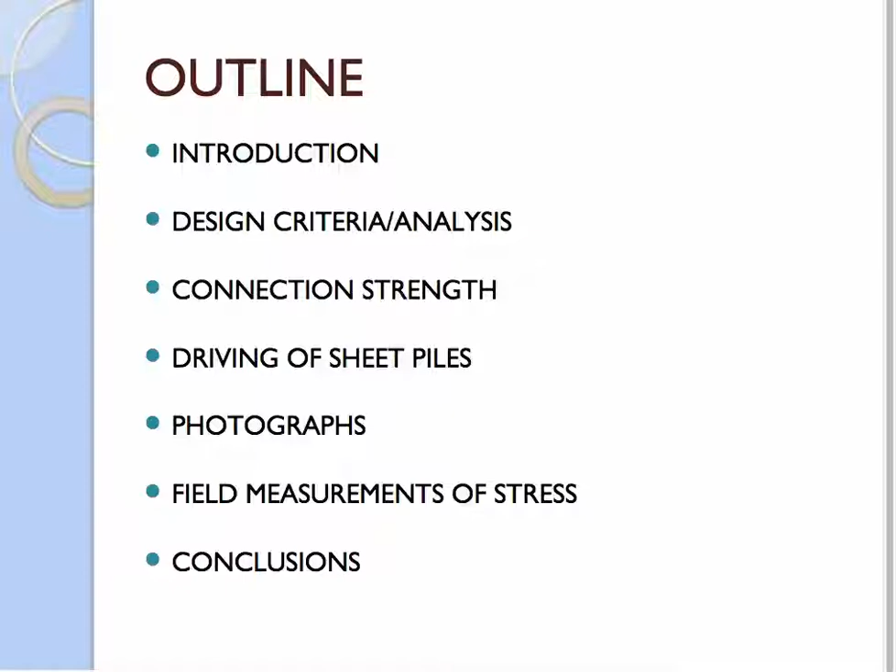Introduction, then we get into design criteria: connection strength of the interconnects of the sheet pile wall, driving the sheet, some photographs from construction. We did get some stress measurements to compare to design, and then conclusions. So what you see here is part of the original design and the bidding.

This sheet pile wall was bid at, the MSE T-wall alternate was bid at $7.6 million. The contractor estimated it would take 11 months to do this, not just to build the T-wall, but to put in 1,573 feet of temporary shoring against active traffic that's as deep as 30 feet. So you build that, then put in temporary shoring, then start the wall.

We came up with this concept to Trumbull of a sheet pile wall with 3-way connectors, which we refer to as fins, perpendicular elements to the face of the wall, serving as vertically planar tiebacks rather than discrete tiebacks. That resulted in 5% savings, which was the minimum amount the Pennsylvania Turnpike would accept. So the contractor made those numbers work.

The interesting thing is it only took 6 months to build this versus the 11 months the contractor had estimated. The height of the wall above the exposed slope is 21 feet. The sheets extend on that outer wall face about 31 feet deep. There was 2,000 tons of steel used.

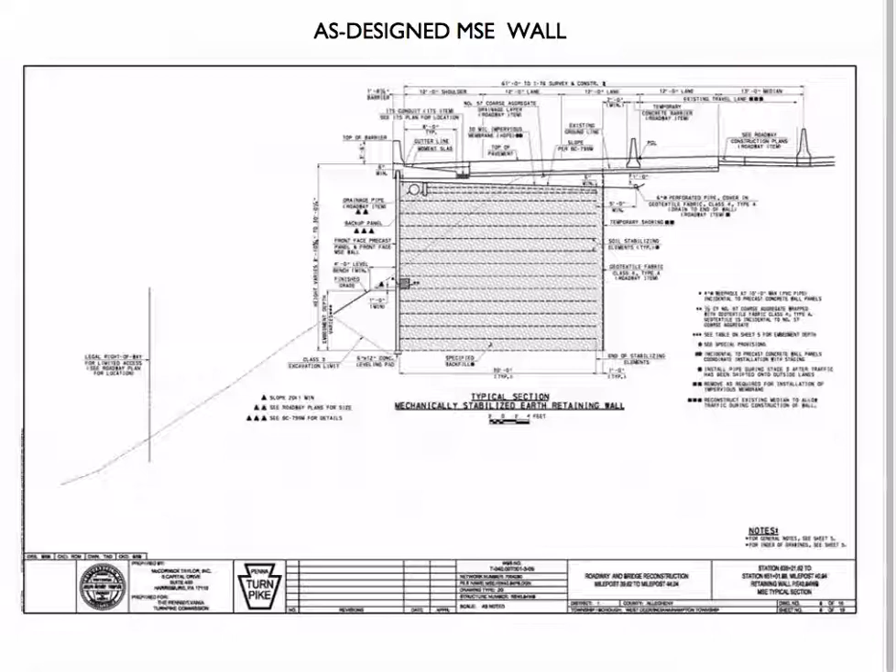This sheet pile wall idea, we basically took the same dimensions as the designed MSE wall. In other words, if we were going to sell this idea, we didn't want to show any deficiency in geometry. The width of the solution, we went to the precise depth, the precise width. We're talking about within inches, figuring that if we tried to skinny it up with an idea such as this tied back sheet pile wall using vertically planar thin sheets, it would never sell.

So we thought this was the way to go. The contractor we had worked with a number of times before, and in fact the particular superintendent was receptive to different ideas, and it was just a good circumstance for us to have this man to work with.

Again, 1,573 feet of wall. The spacing between what we called the main fins, which constituted 4 sheets along the front face before you hit the next three-way connector, was roughly 9.5 feet. So that's 4 sheets, each sheet's width about 2.32 feet.

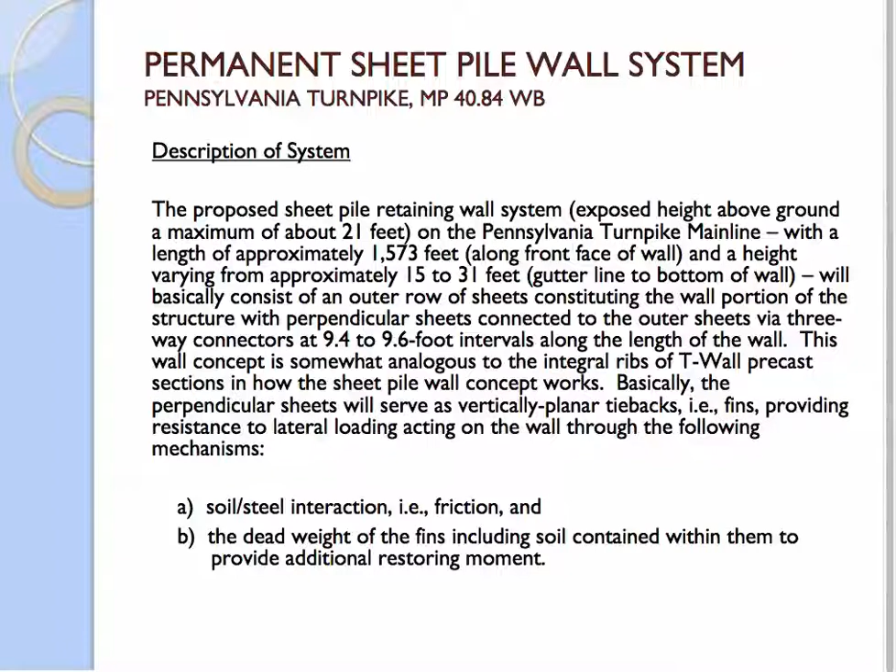Again, this wall was founded at the same depth as the MSE wall, and one key factor I mentioned, the quantities, was the cementitious backfill placed in the wedge between the wall face and existing slope. It would have been difficult to compact material down in that wedge. At first, the contractor was somewhat wary of the cost of that, but we told him we really needed to do that for our comfort, that the material was going to be of sufficient integrity and not basically placed or dumped into place. It needed to be solid, as there was going to be a long pipe run, a storm sewer run along the entire length.

So that's where the flowable backfill comes in. That strength of the flowable backfill, the fact that it would set up, also has a real impact in that if material is set up, at least right at that wall face, it's not exerting any significant pressure on the wall.

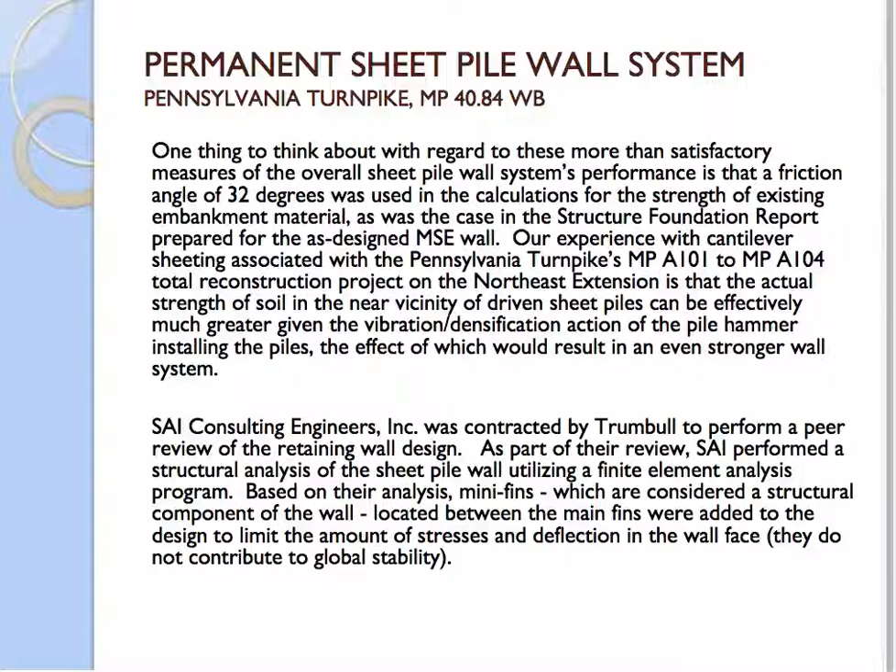Part of the reason we were able to think of this idea is we had done work directly for the Pennsylvania Turnpike a few years earlier in which sheet piling was used for some reconstruction. There was no widening of the template, but there was rubblization of pavement. The result is you raise the grade, and you're on a very steep slope, 1.5 to 1. So cantilever sheeting was suggested for use with the turnpike. There were matters of permitting with wetlands at the bottom of the slope, and if you went with a fill, this would be an issue - it would delay the project by a year and a half with environmental permits. So it was the fact that we had that prior experience with the turnpike on a sheet pile wall, which had never been used as a permanent wall on a turnpike, that gave some level of familiarity and confidence that what we were showing was something that reasonably could work.

This is just showing a three-way connector where you have the wall face and the perpendicular fins. This was what was proposed - what the contractor, Trumbull Corporation, and their subcontractor Brayman, who actually installed the wall, wanted to use.

But when it came time, after getting this approved - that approval process was 6 months - there were contrary opinions as to doing this. Could you meet a 1-inch deflection requirement? The answer was basically no. Nobody would want to guarantee that if you're driving sheets and there's interlock, with some play in those sheets. By going this route, they were buying into a relaxation of what you might call deflection, but in reality what we were really after was a tolerance of where these wall face sheets would end up. We couldn't guarantee we'd be within 1 inch. You're driving on a steep slope, and if there's going to be movement, it's going to move in the direction of least resistance, which is downslope - it's certainly not going to move laterally or upslope. So we included a 2-inch tolerance, which ideally meant they had 4 inches to work with to get that wall face in place.

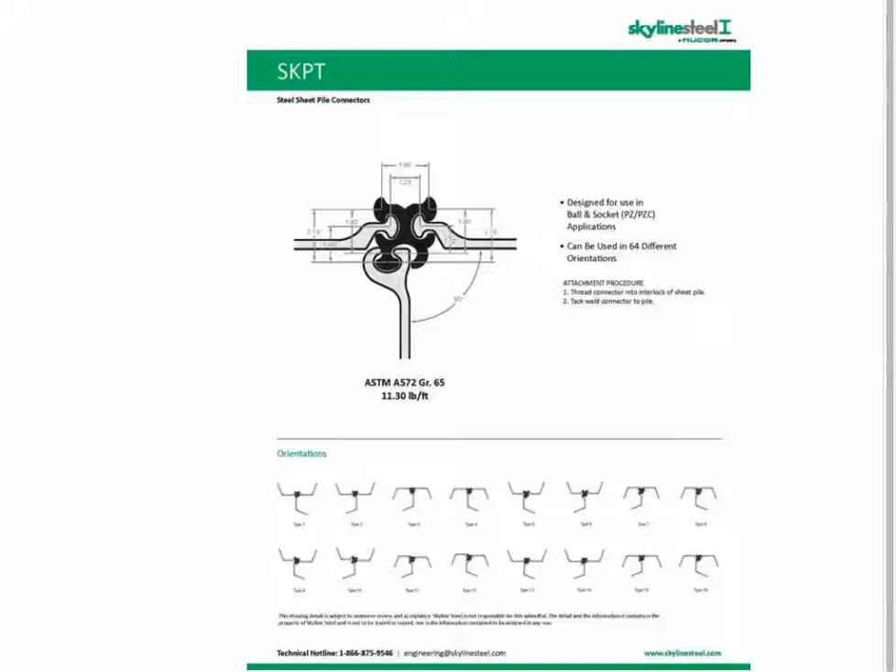So this connector was not accepted because it was not American steel - it wasn't American made, and this was a Buy America project. The only ones of that particular type available were foreign made. So before construction got going, there was some scrambling to find another American-made connector. Here you have, in a sense, 5 potential hookup places for this particular connector called SKPT. That's what was actually used as part of the construction.

Design criteria: these parameters here, existing embankment parameters, were provided in the foundation report written for the MSE wall, and they included a moist density of 120 pounds per cubic foot, saturated density 125, no cohesion, friction angle of 32 degrees. As I said, you can't really justify a 32-degree angle on an existing slope that's 33, 34, 37, 38 degrees, and that is again why we did not consider passive resistance in front of that structure.

LRFD analysis all worked out well. We had excellent resistance in the pull-out, basically the tension capability of the fins, 1.5 to a factor of 1. Overturning performance was 1.17. So that was another reason to just go with the as-designed MSE wall dimensions - if we tried to skinny that up, we would drop below a performance ratio of 1.0.

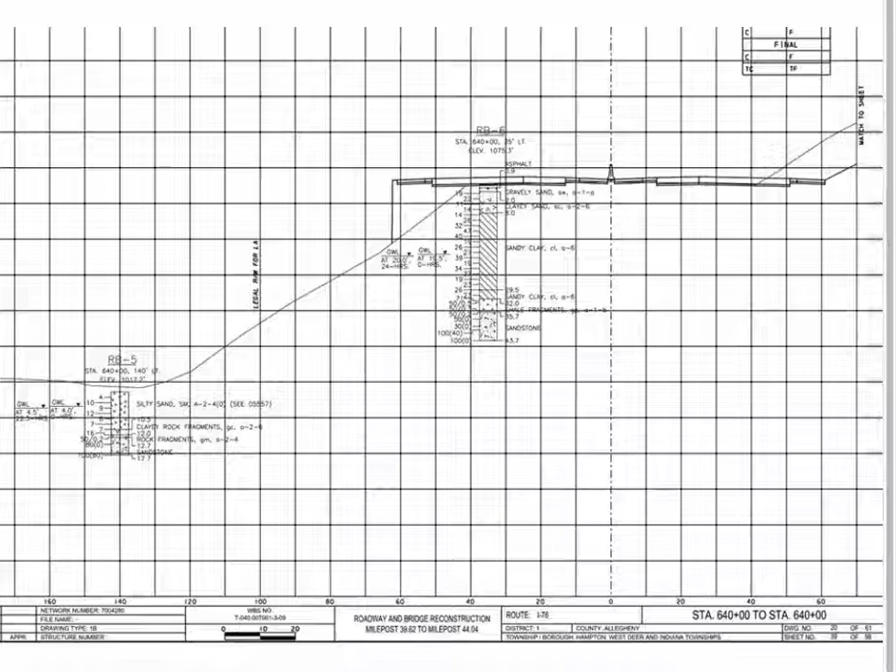This is just a graphic representation from the foundation report that shows test boring results. Basically, they had an N value of 50 and 25, and that's the material they were driving the sheets into. So it turned out to be not an issue, that is the driving.

As far as the analysis goes, this is the maximum height of the wall, from that particular cross-section. And how we analyze this, we assumed, of course, no passive resistance in front. We show an inclined angle there, representing the active failure wedge. That's significant in that anything to the right of that incline, a 61-degree horizontal active soil wedge, could be used in the passive resistance to hold back that wall face.

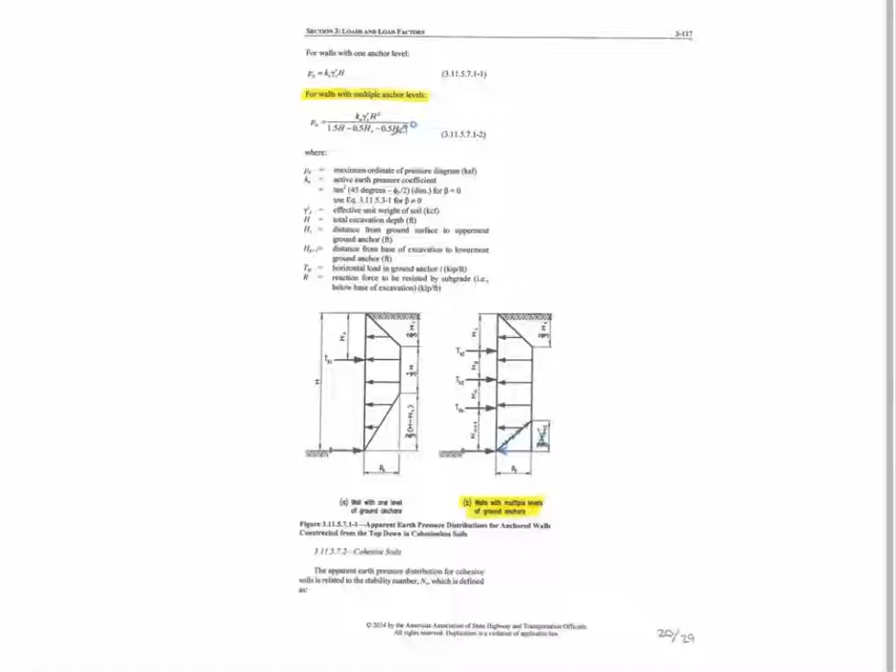This next slide shows, and it's an AASHTO reference, the figure on the left for a single anchor, and the figure on the right for multiple anchors for a wall. What we did, basically, was have a continuous anchor, and we carried the back of that pressure diagram down to the very bottom. You can see in blue it's X'd out, so we wanted to plug in a little more, which resulted in plugging in a little more load than that figure showed.

Trumbull Corporation had hired another consulting firm, certainly familiar with the Pennsylvania Turnpike, to essentially provide a peer review of our work, being that the idea was so different. They felt it would help to have a company with a prestigious reputation with the Pennsylvania Turnpike weigh in on what they thought of this idea. They did agree with the idea. Their comment was that the calculations we performed were fine, but we really should also be considering stress concentrations.

Basically, the flanges of the sheet piles—this is some representation of the outer wall of the sheet piles, the PZC 26 sheets—don't receive so much stress, but as soon as you make that bend on the web, that's where you get high stress concentration. It may be a little difficult to see, but if you try a blow-up view, you may see the hotter colors are at that point where you go from flange to web, both for what we call the main fin and the mini fin.

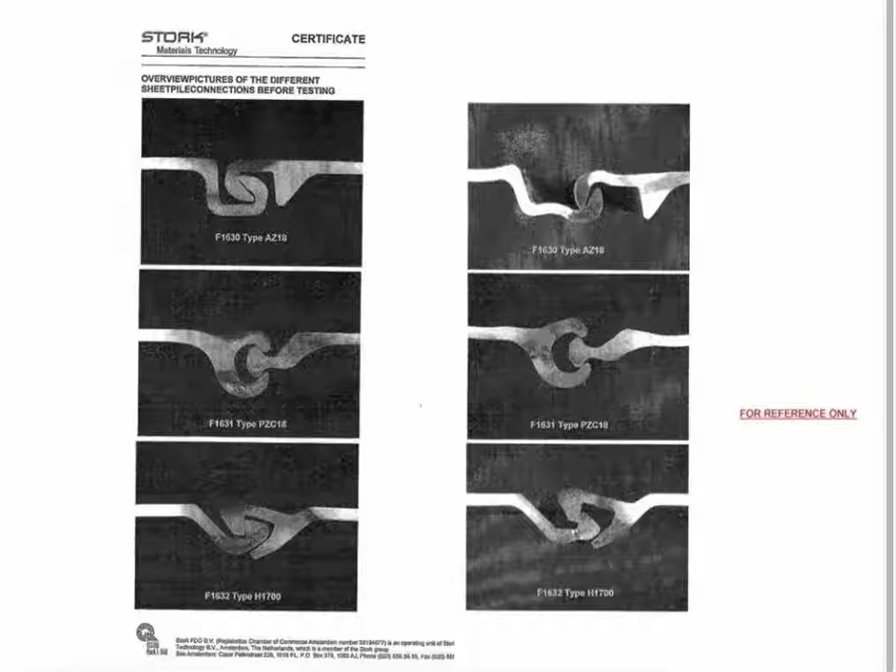The driving of the sheet piles — I have a really cool video here, but I guess we won't be able to show it. This is worth looking at regarding the driving of the sheets.

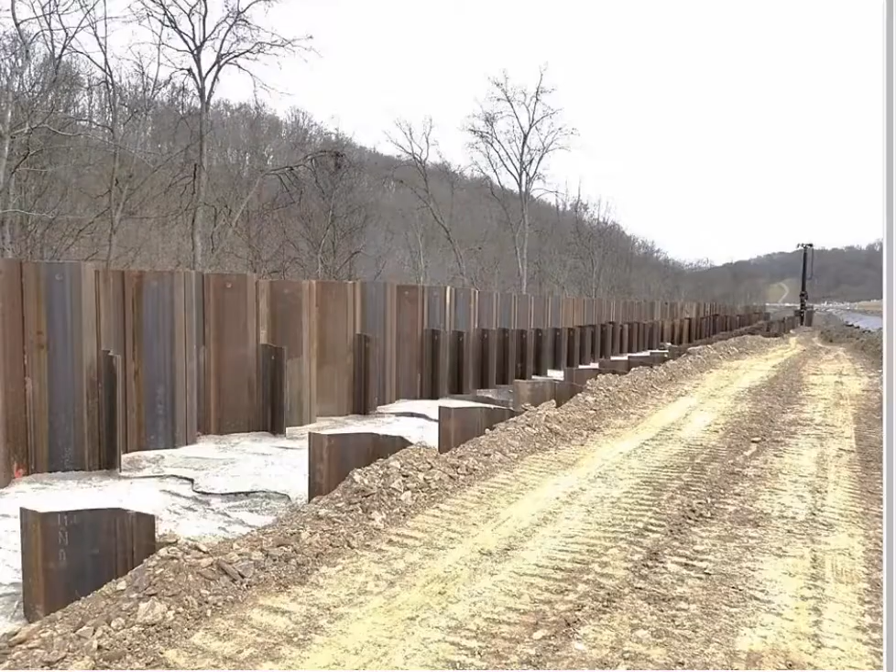The area showing the flowable fill was to allow for the storm sewer run to be placed. Here's another shot of that cradle that allows for pipe placement or any utilities.

This is the mini fin I referred to — there are 3 sheets here that help hold the wall face in check. Here's another shot of the outside lower end.

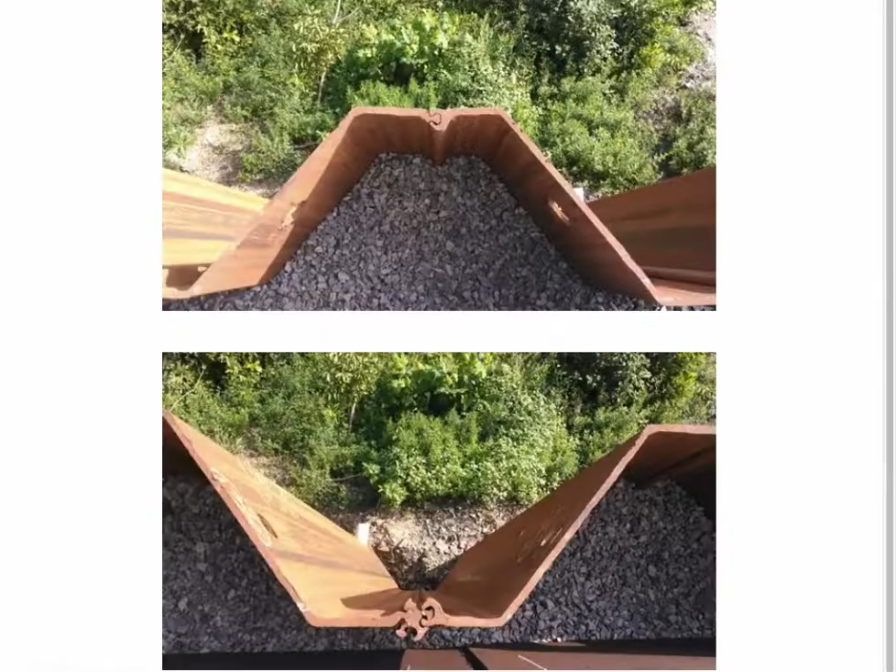Here are the connectors — this shows a 2-way connector, and this is a 3-way connector on the lower section. Here's another shot showing the full 13 sheets in place.

What's not in place yet is the pavement structure. This photo shows the expansion joint, which was a factor used to reduce impact on the sheet pile itself — so if there are accidents, the expansion joint mutes the effect.

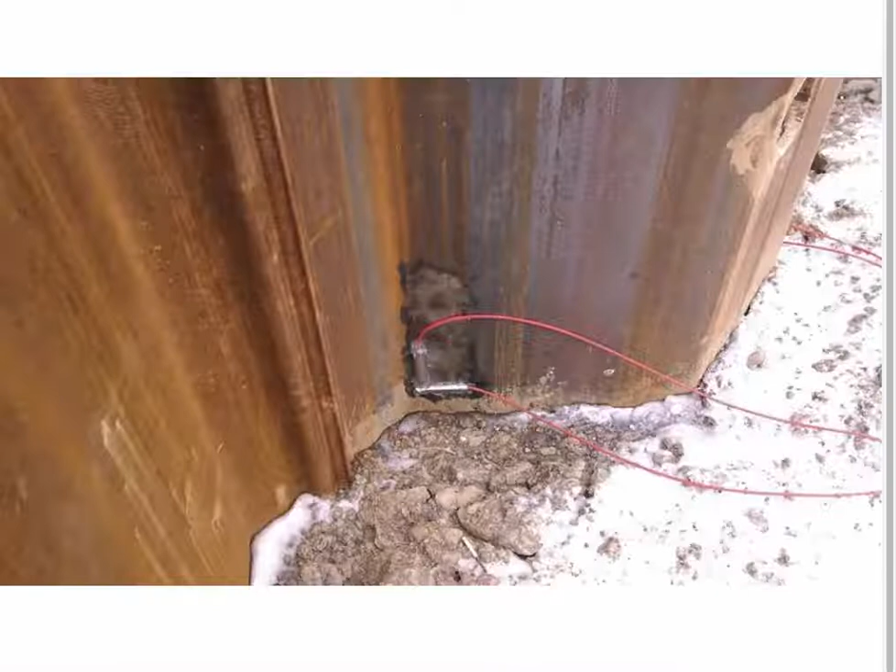Stresses, real quick — we had two vibrating wire gauges right at the bend point, vertical and horizontal. We weren't expecting much vertical movement. Horizontally, we're at 11 KSI. We don't have all the fill up to grade yet, but we're at 11, with more material to go, and we should stay well below the 18 limit. Curiously, a vertical stress of about 25 or 26 showed up, which could be resulting from some defect or settlement in the fill area.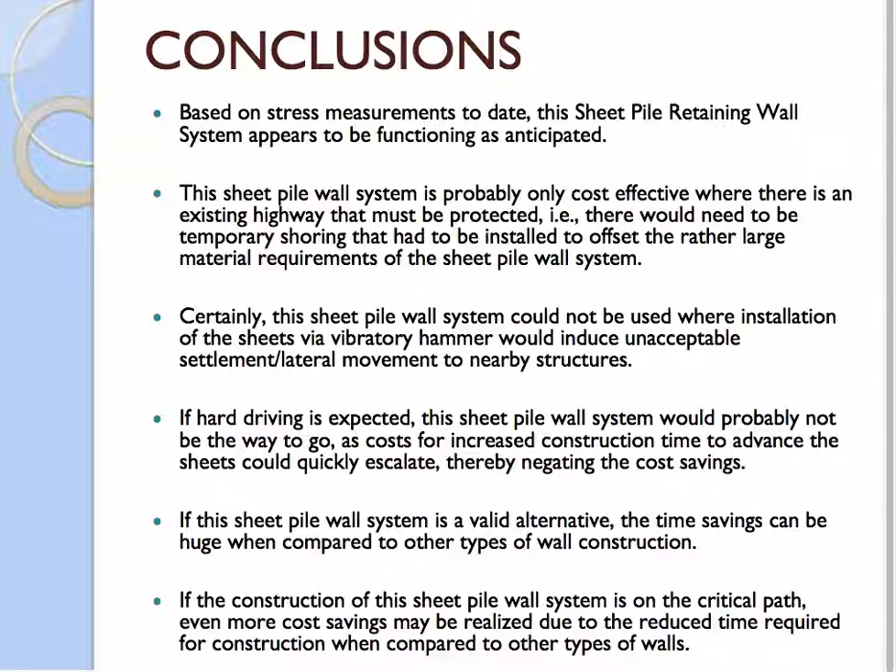I won't go through all these conclusions, but basically this wall works and is viable if there's a need to put in temporary shoring to protect adjacent highway or traffic. Without that need, it's not economical enough to compete. So anyhow, as far as questions...

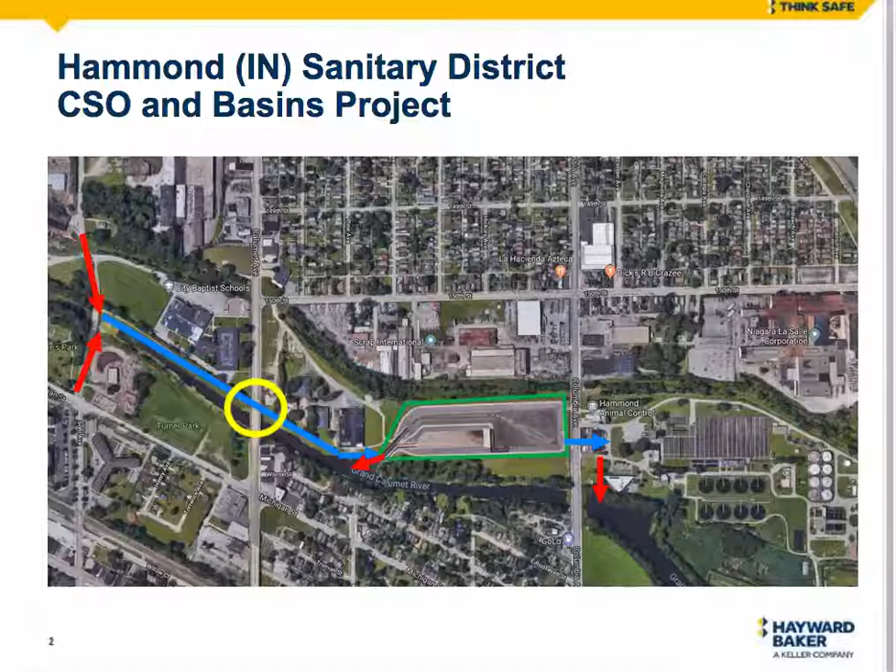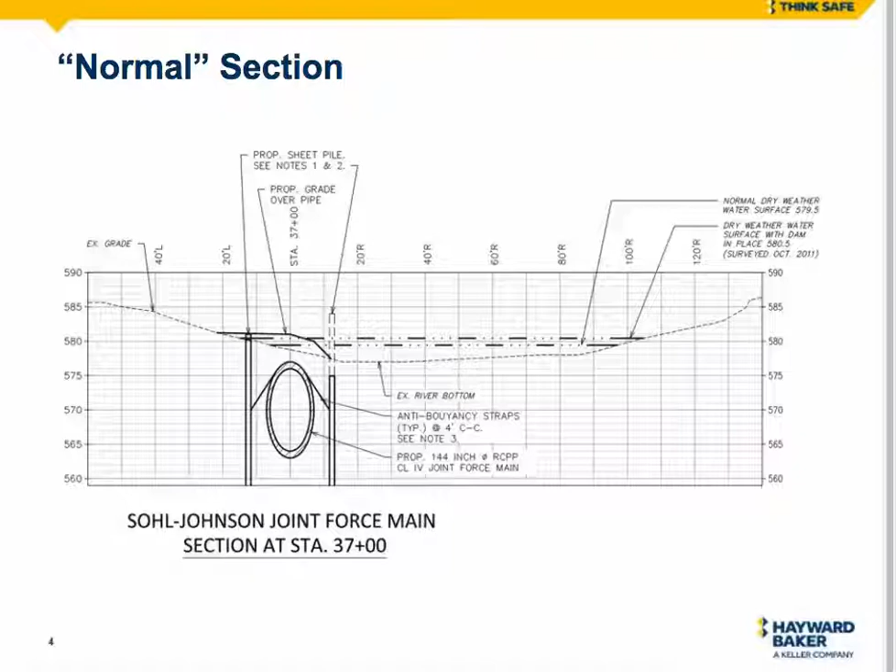So what were the problems? Obviously, we've explained some of them. The very weak upper soils may lead to a collapse in the leading face of the jack and bore operation. Also, the jack and bore pipe was actually slightly smaller than the rest of the force main, due to the thickness required for the jack and bore and to resist buoyancy. This resulted in a flow constriction. And frankly, it was very, very expensive to do this operation.

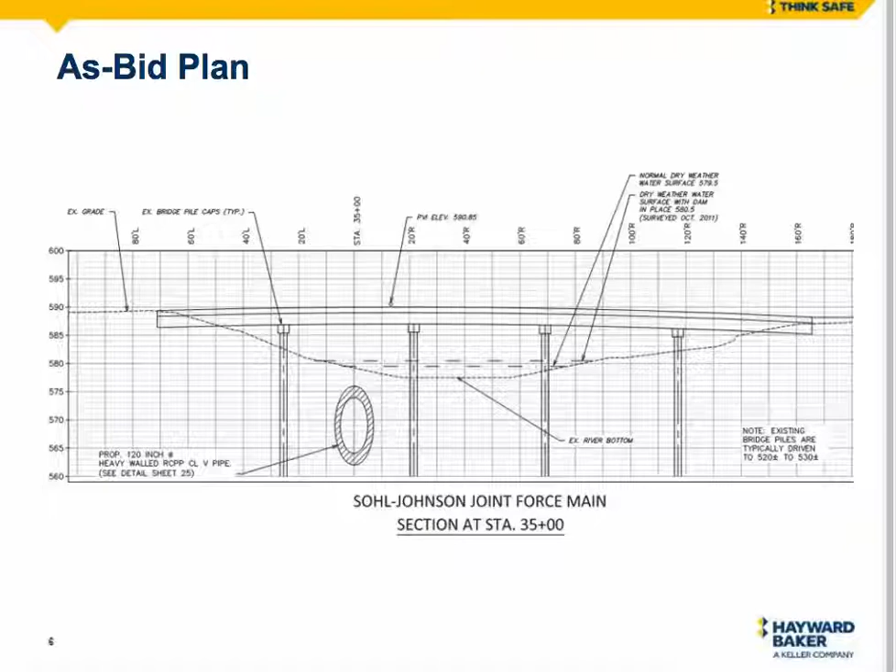So we came up with a value engineering alternate post-award. We were doing some other work on the project, so we came up with a cut and cover technique, working at 7 to 10 foot of headroom. That may sound crazy, but in the next few slides I'll show you how we ended up doing it.

We had very, very weak soils with high moisture content, so water was going to be a large problem. To combat that, we proposed a system of soil mixing and micropiles.

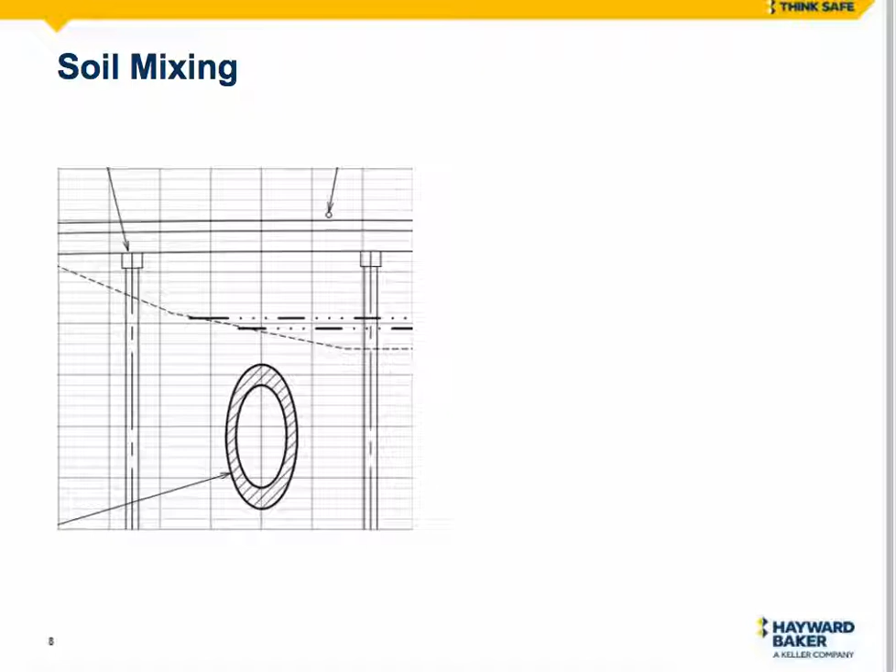In this case, these were 9 5/8 inch micropiles, placed at 12 inches on center, so there was only a gap of approximately 2.5 inches between the micropiles. They were installed along the center line of the soil mix columns, which were 24 inches, with the micropiles being 9 5/8.

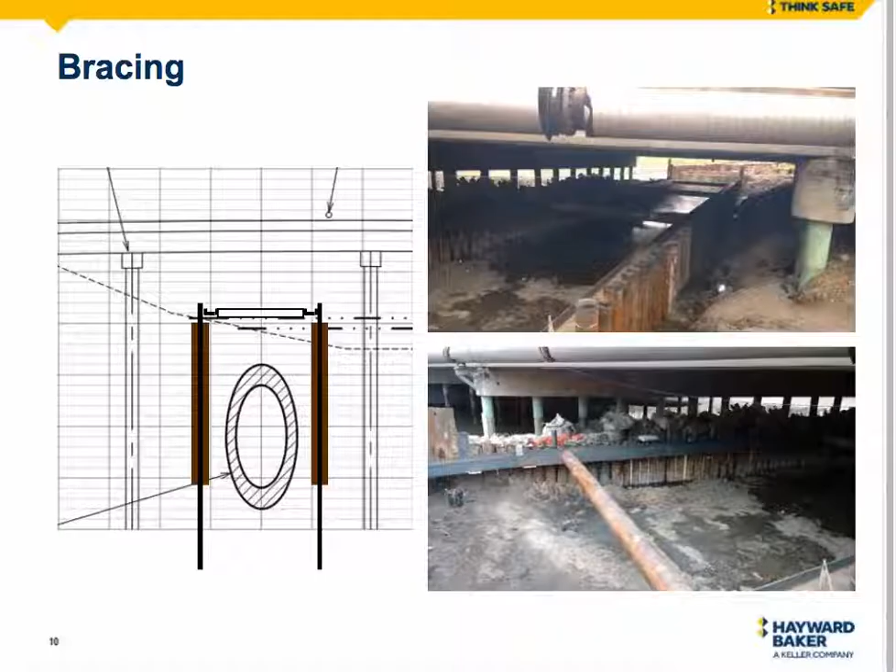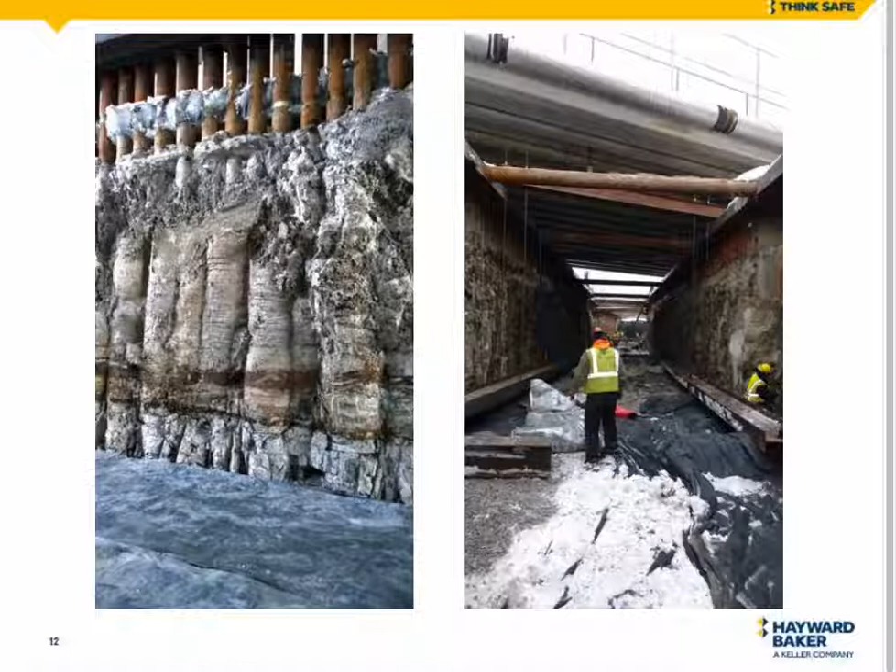So here's what the finished product looked like. You can see how dry it looks. Here's a few more pictures. One thing I'll point out so you get a view of the different soil conditions: you can actually see the color change from the soil mix as it hit the glacial till. The soil mix tool could not actually penetrate the glacial till, it was so stiff, and that's the very light gray soil at the bottom of the picture on the left-hand side. On the right-hand side, you get a perspective of the bridge overhead with the bracing and the whole trench coming through. It looks very nice and dry, and for the most part it was.

Unfortunately, when the river comes up, even the best earth retention system is not going to stop it. We did have to wait for some time while the pit flooded, and then the general contractor had to clean it out.

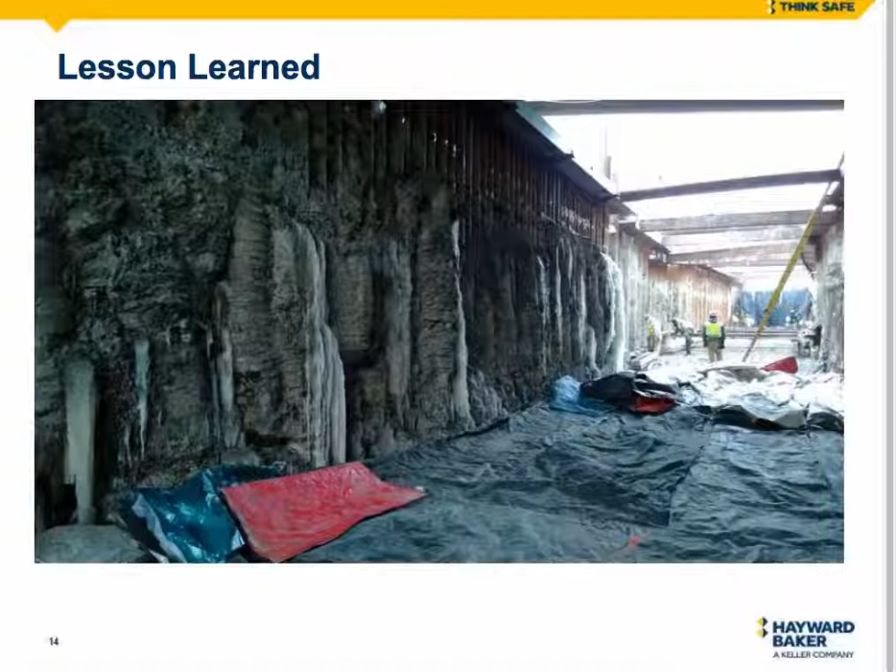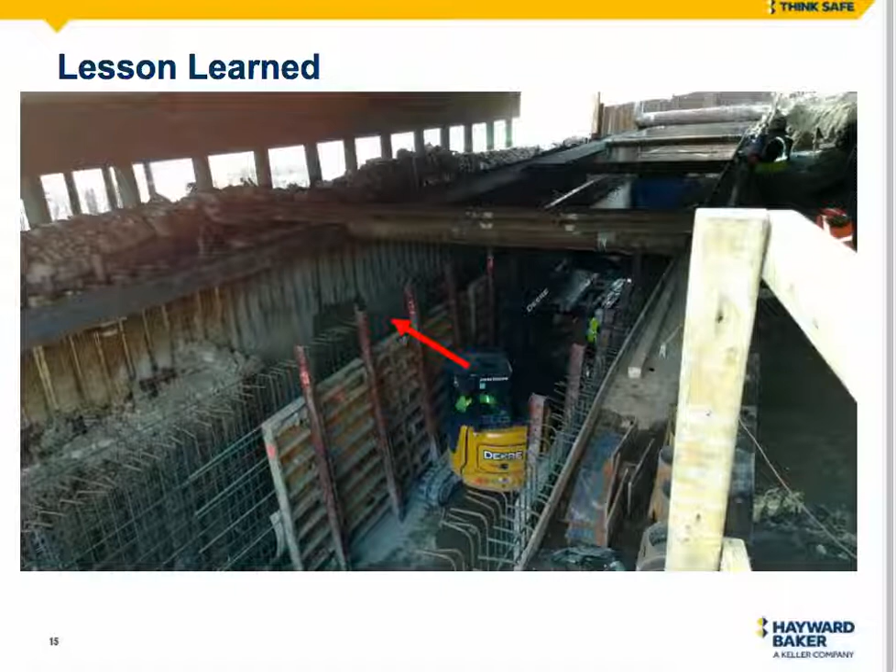What we found is that it almost created a hydraulic jacking effect. As the water would penetrate little crevices between the soil mix and the micropiles and expand, it would basically push the soil mix off. Then as the weather warmed up, it would actually peel off the wall. To fix that, we came back in and put a layer of shotcrete to hold the face together long enough for them to get the combined force main in. You can see here they're actually putting the force main in. They had converted this portion of the force main, and I believe the rest of it, to a cast-in-place structure to save money as well.

So finally, the nice part about this system was that while it was sticking up above grade while we were doing all the work, to finish this up and restore it back to grade, because we had the micropiles, all we simply had to do was come in, remove the bracing, and then we could twist off the micropiles, leaving the rest below grade.